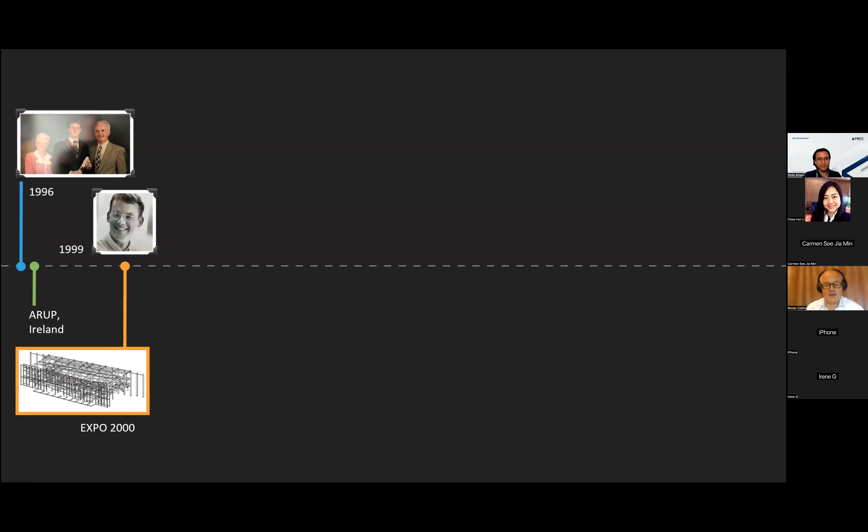So throughout my presentation, I'm going to use a timeline from when I graduated from university in 1996, which means I'm now giving away my age. I'm nearly 50 years old. I started my career working for Arup in Ireland. In 1999, the time of the millennium bug, my first experience of BIM and 3D modeling and construction 3D work was actually a project in Germany for the Expo. I was the manager for the Irish Pavilion as a structural engineer. So that was my first exposure to 3D modeling.

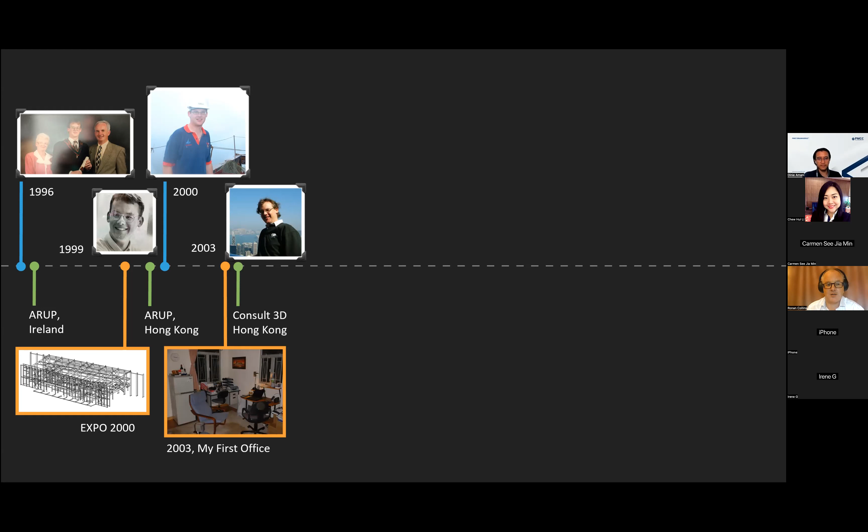In 2000, I moved to Hong Kong and I joined Arup in Hong Kong. This is a picture of me standing at the top of IFC2 during construction when I was younger and a bit thinner. And then in 2003, after spending a bit of time working for Arup, I started my own business. So since 2003, that's when I've really started my journey into BIM. And I've been an advocate for technology in construction since then. And there's a picture of my office. So that kind of sets the scene for my career. I'm a civil engineer by graduation, but I'm a technology expert in construction.

So in 2003, I set up a company to use detailed models to reduce construction costs and ensure buildings were completed on time. And what's interesting is in 2003, I thought I would have maybe 5, maybe 6 years and the industry would catch up. And here we are 20 years later, and we're still trying to get the industry to catch up. So one of the things I want to get across is that the BIM world is going to be transformed by the software companies, and it's also going to be transformed by the users. So how does it look comparing what was done 20 years ago to what's going on now?

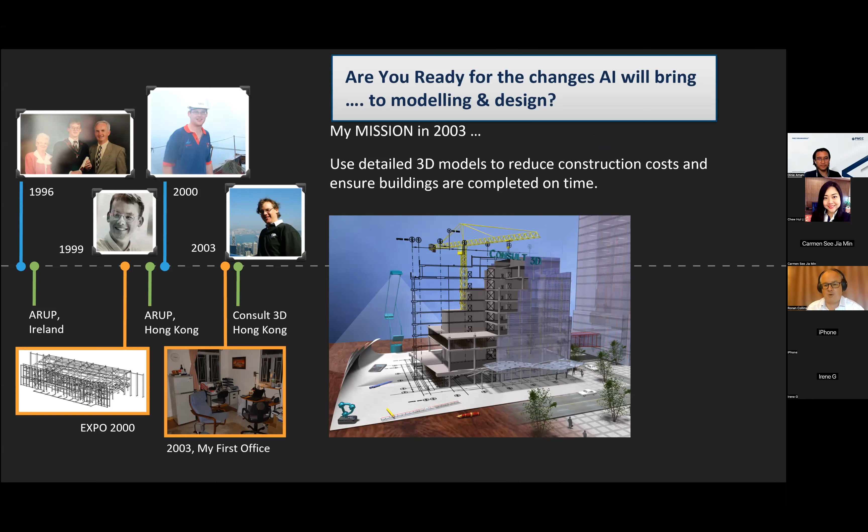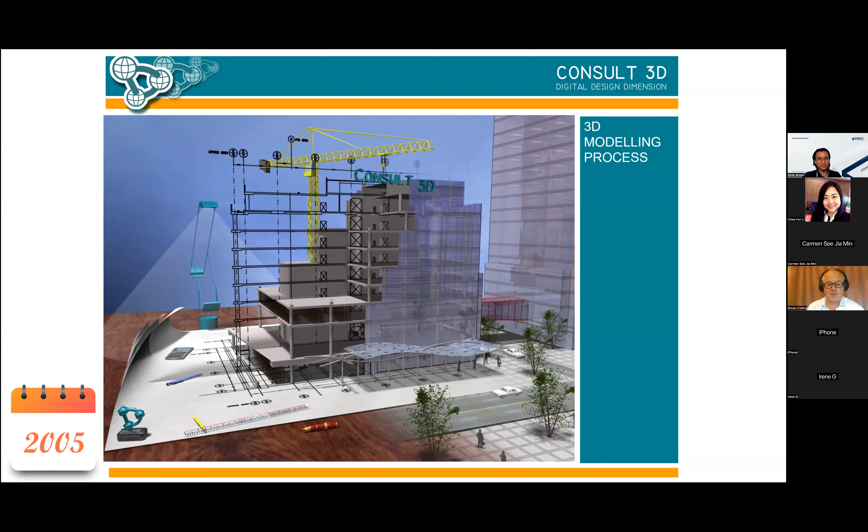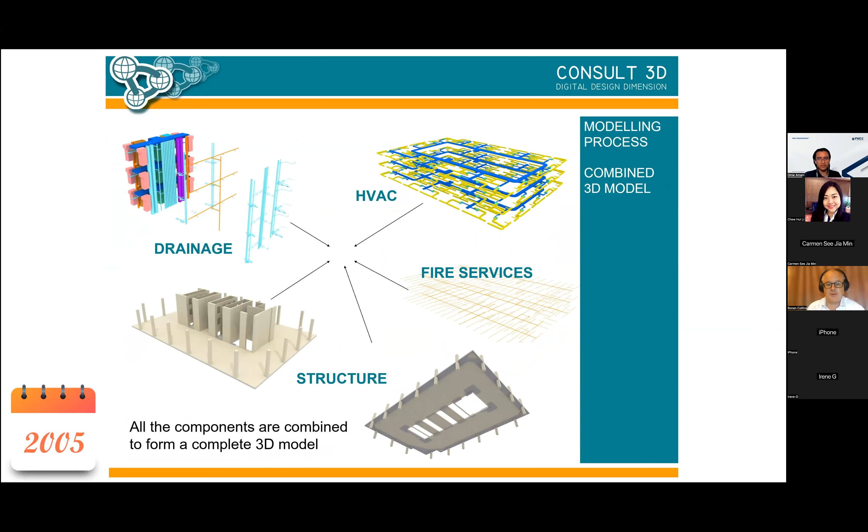So this is an image. This is actually a couple of slides I found in my archive from a presentation I gave in 2005. And I could give this presentation now, and it's just as relevant. So in order for you to actually say that you've got a BIM process, you need to have initial models. So you've got to have your structural models with as much detail as possible. You need to have your mechanical models, again, detailed out. And also you need to have all your risers, your pipe systems, your fire sprinkler systems. It's all going to be modeled up. And those models can then be what we call federated into a combined model or a central model. So when you put all these elements together, you then end up with what we call a complete 3D model of the structure.

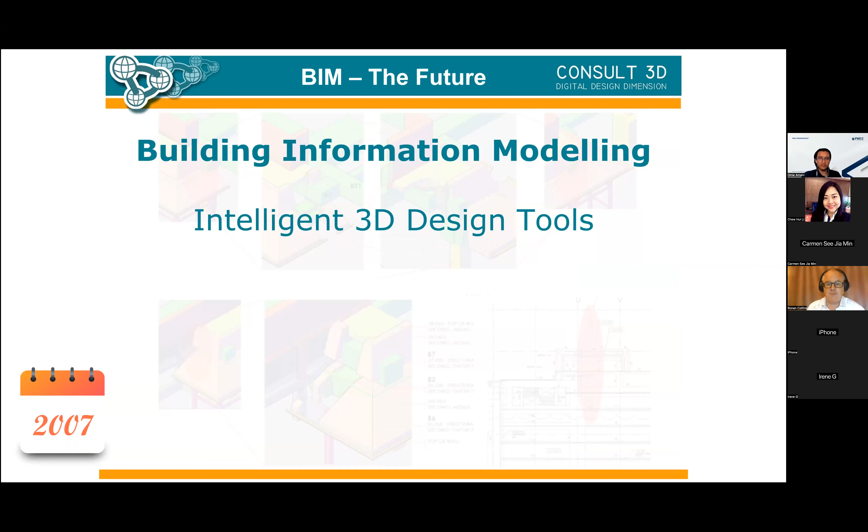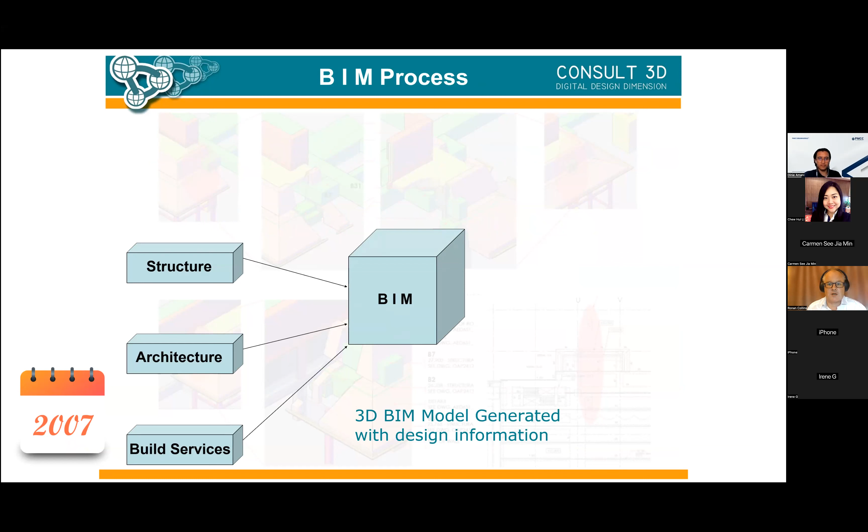Go slightly forward to 2007 when the actual term BIM or building information modeling became a bit more commonly understood. And the difference here is that the models were generated by the consultants. So you've got structural models, architectural models, building services models, and then you can have specialist systems. And those models are used to do the design first. You do your coordination, you sort out your difficulties, and then you produce the drawings.

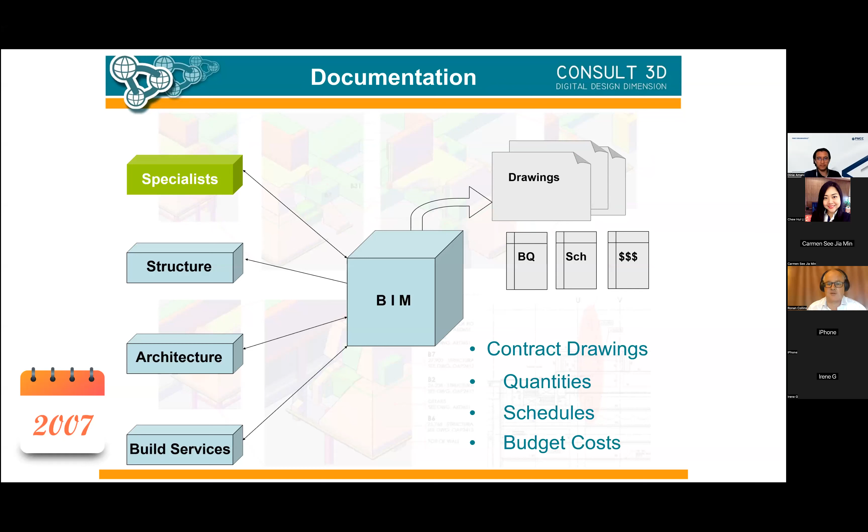And the other thing that came out of this presentation, which I thought was quite interesting, was the first time I'd seen this term BIM manager. So this is a role where the manager is basically managing the process of generating these models, and you have teams of people supporting it. But these are not separate. These are the structural team, the architectural team, the building services team.

So what's the difference between 2003 or 2007, that time frame, and today? And what's the impact of AI? So back in those days, we used AutoCAD 3D modeling. We used things like the forerunner to Civil 3D, and we even started using the forerunner to Revit. And now what we're looking at is what is Autodesk doing? Autodesk is the preeminent vendor in this space. So when it comes to BIM tools, Autodesk is the behemoth.

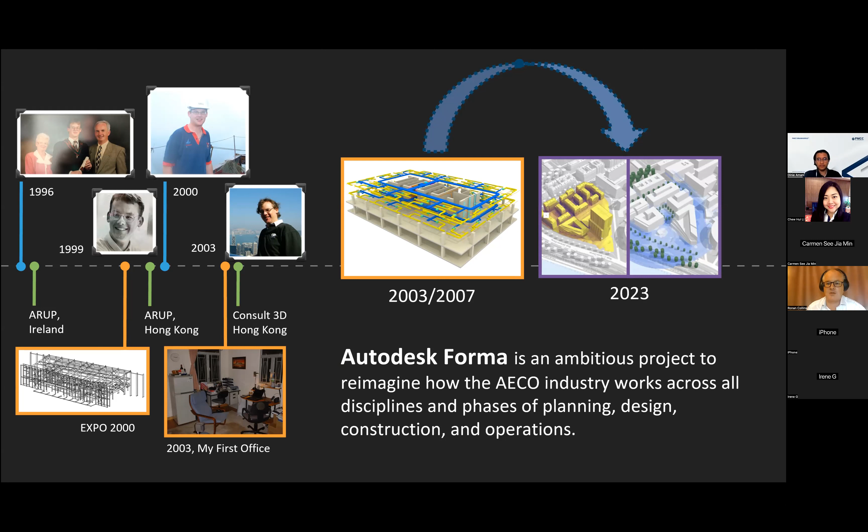And they've announced in the last 12 months a new platform called Forma. And this is basically going to transform, or in their minds, transform how we operate in the industry, because they're going to move away from a file-based system to a database system. So it's all going to be driven by data. Now, Autodesk are going all in on Forma. And you can tell this by the way they're recruiting. They've got advertisements out at the moment, and it's quite clear they're going to bet big on AI.

So what are they doing? What they want to do is change the way that we, the industry, capture information, use that information, and exchange the information. And being Autodesk, they want to control that arena. So they want to be in the space where they're actually doing all of that capturing and analyzing and exchanging. The way they talk about this in Autodesk speak is they're going to empower our industry by transforming how we, the professionals, are using data to capture knowledge, inform our decision-making, and deliver projects.

So Autodesk are moving in on the data space, and they want to use data as the backbone. They don't want to use models. They don't want to use files. They want to start setting up this granular data on which everything else is based. And so if you want to learn more about what's going to happen in the space of BIM and AI, then you need to study Forma, and you need to watch what's going to happen with Forma.

But what's interesting is Autodesk are talking about a 7 to 10 year time frame. So their roadmap for this technology is not quick, it's not short, it's long. And they believe that it's going to take a long time to get the industry to catch up. So they're not trying to do this quickly, but they are going to be doing this for the long term.

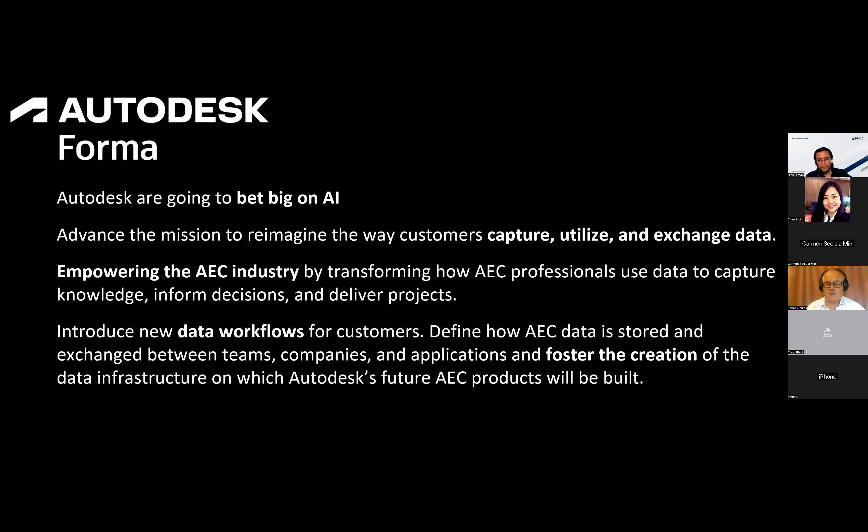And what's interesting is from an AI perspective, the lessons that we're learning now about ChatGPT and the security of information, the rights to information, the IP in the information is going to become a critical issue for architects, engineers, and contractors who deal with Autodesk, because there is a risk that when you start putting your information on their systems, they're going to leverage it for their benefit and their profits.

So it needs to be done carefully. So that's BIM and AI. And I say, I'm going to race through this, so if you have got questions, do interrupt me. I'm going to step into the next domain, which is construction planning.

So again, using a slide from 2005, this was the reason I got into BIM in the first place, was the idea that you could link the construction planning information, effectively a Primavera P6 schedule or a Microsoft Project schedule, to a model. And so you could take all the tasks in that construction sequence and simulate what that would look like in a building sequence. So again, a very early simulation of what this would look like. This was done to prove the concept.

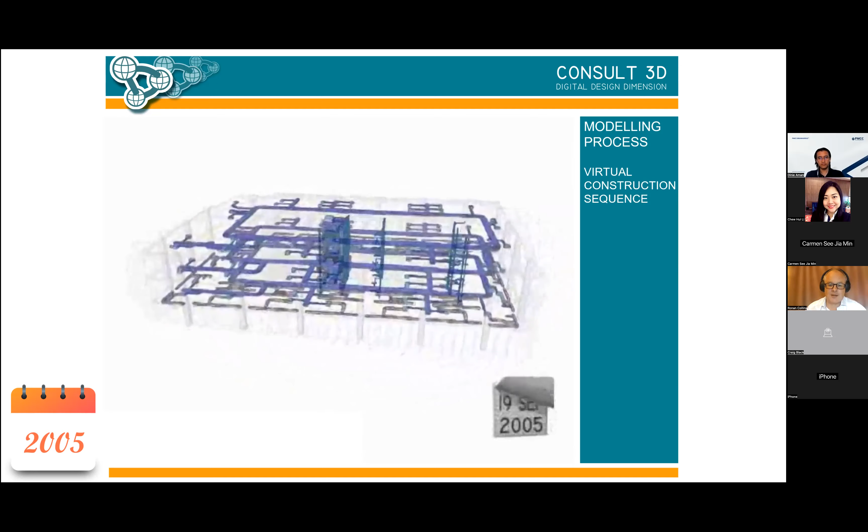So we basically took a model and then we linked it to a construction sequence. And here you can see the installation of ductwork inside the building, while you can make out the installation of the curtain walling on the outside. So again, this is 20-year-old technology, but it's not used on projects today. And you have to wonder why. Why are contractors not using this as a kind of a normal process?

So in terms of this technology, in terms of BIM, we call this 4D or 4-dimensional. So you're basically adding time to the model. And this can be useful across a number of domains. So again, I'm sitting here in PMCC's office, and they're a very well-known project management company. They deal with project scheduling on a regular basis, if not in their daily work.

So you can use 4D at the early stage of a project during design. You can use it during tender to understand a project and do some construction planning. You can definitely use it during construction. It's very good for safety planning and site logistics. But more often than not, we're seeing it used in claims. So it's used for claims of what was actually planned against what actually happened, and then recording what happened in design changes.

So I'm going to show you an example that we worked on a couple of years ago on a stadium project, just to give you a sense of how powerful this tool is. So this was a stadium in Atlanta. It's called the Atlanta Falcons Stadium, or some people know it as the Mercedes-Benz Stadium. If you get a chance, look it up on YouTube. The roof on this thing is incredible. It was designed by HOK, and it opens like a camera lens. It's got an aperture. It's 30 stories up in the air, and it's 23,000 tons of steel.

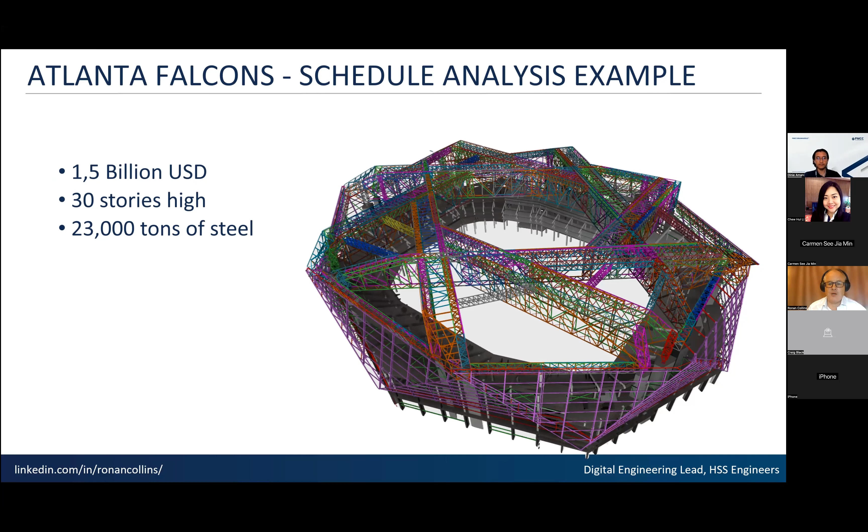And we used 4D just to plan the erection of the steelwork. So we had used Tekla Structures to do the detailing for the steelwork, and then we used the 4D modeling to actually plan the erection of the steelwork. And the reason being that the craneage is quite complicated. So this is an image from the model. You can see there's a lot of steelwork that has to be partially erected on the ground, and then it has to be lifted into place.

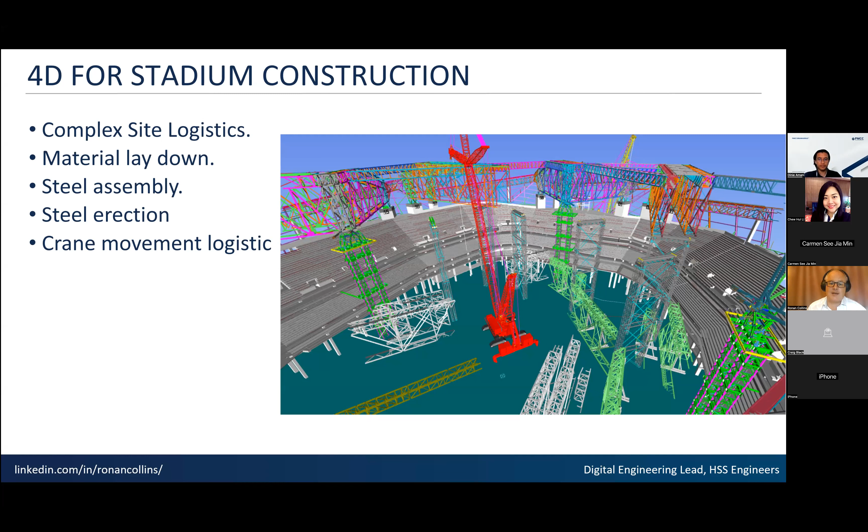So you need cranes for the erection of the steelwork in the laydown areas. You need cranes for the steel assembly, and then you need cranes for the actual erection of the trusses in the air. So we used a 4D model to actually come up with a plan in terms of temporary works, site logistics, deliveries, et cetera, of the cranes. So you can use these tools for very effective construction management.

And this is just a little excerpt of what that looks like. So you can see in this sequence the erection of the roof in the multicolored steelwork up in the air. And as the video progresses, you'll see how it gets much more confined as the project goes ahead. So here you can see the erection of the towers. And then you're going to see a lot more equipment turning up on the site. So at one point, it's going to be 7 or 8 major cranes inside the works area. Some of those cranes are doing initial assembly, and some of those cranes are doing actual installation.

The great thing with this project, it was very well documented. So if you really want to see what they were doing and look at it in a lot more detail, there's a lot of videos on YouTube of the actual sequence of works, and I'm going to show you one snippet in a second. So we used this 4D sequence to actually work out the crane locations, work out the method statements, everything else.

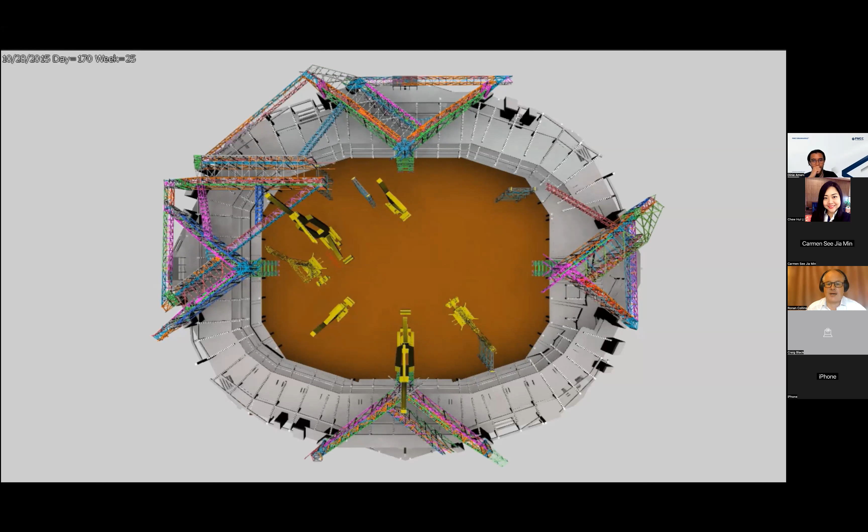But we did it in a process that's very manual. So every time we wanted to change a sequence, we had to update the schedule, we had to update the durations and schedule, we had to update the number of cranes, and we had to go and change the simulation. It took a lot of effort to figure out in one kind of scheme whether it would work or not.

And where AI is going to make a difference is AI can run hundreds of thousands, if not millions of iterations very, very quickly. So I'm going to show you what this looks like in the real world, and I'm going to show you how AI is going to change how we do construction planning. So that's just an example of what the sequence model looks like. And just to show you, oops.

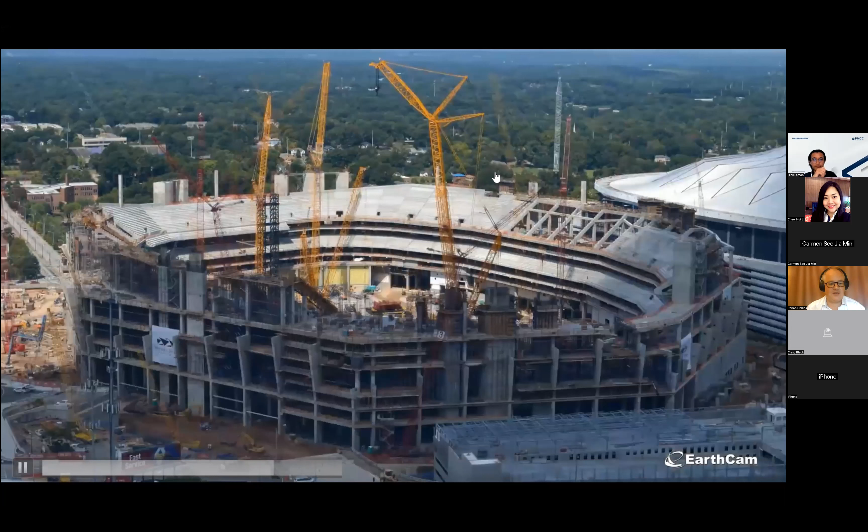Oh, Carmen's shaking her head. I forgot to do one thing. I forgot to turn on my share sound. Hang on 1 second. So even the technology guy gets it wrong sometimes. Let's try that again.

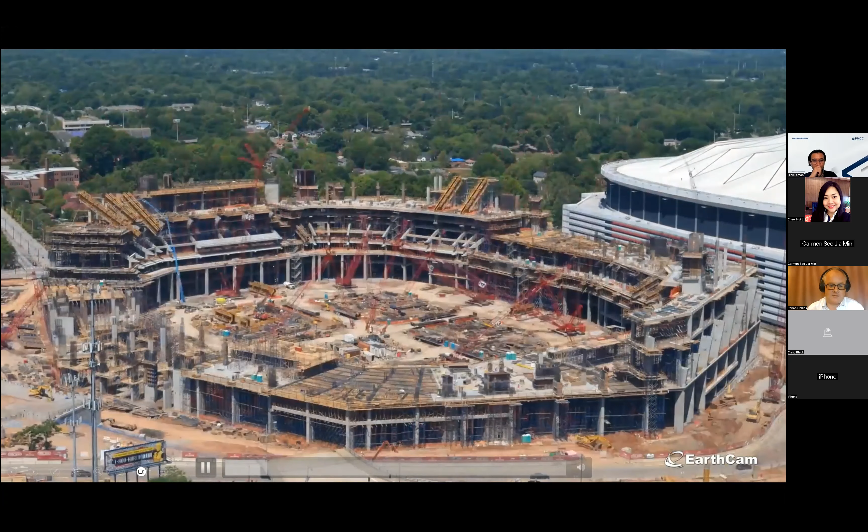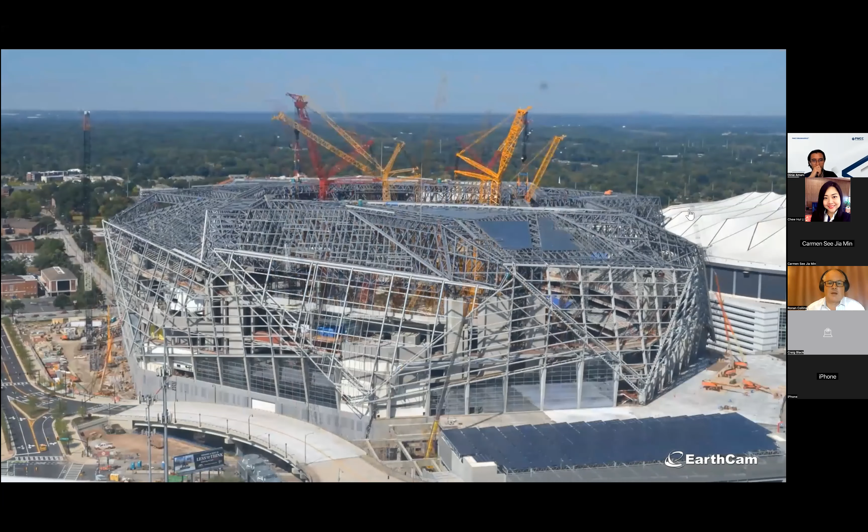Okay, you can see all the cranes getting stood up in the air to go to the work. So you can see here the complexity of a building like that. These are unique buildings. This was a $1.5 billion ego project. So the people that build these stadiums are the billionaires in the US economy, and they're all showing off.

But the important thing here is that it doesn't have to be a complicated project to use these kind of tools. Obviously, they're useful, but the idea of using a model and a link to a schedule to do planning is critical. And in the theme of this presentation about how AI is going to change our world, I want to bring your attention to one technology called Alice.

Alice is a technology that's coming out of the US. People have known about it in kind of general terms in the last 3 years. They've been at it for the last 5 or 6 years. It's a rule-based system that relies on a model. So if you don't have a model, you can't use this Alice tool. And it does explore millions and millions of options. So it will go through a whole bunch of scenarios about how you can do this. And it will disrupt the industry.

Now, it will not be for everybody. It's not the cheapest technology in the world. It's an expensive tool to use. But if you have a very sophisticated way of managing projects, if you've got tight resources, and if you've got constraints of many complexities, this is a tool that you should be looking at. So I'm going to show you an example from the UK where they're actually using it on a railway project, and it will give you a very good flavor of how Alice is actually used. So I'm going to hand over to the guys who are on the Alice project.

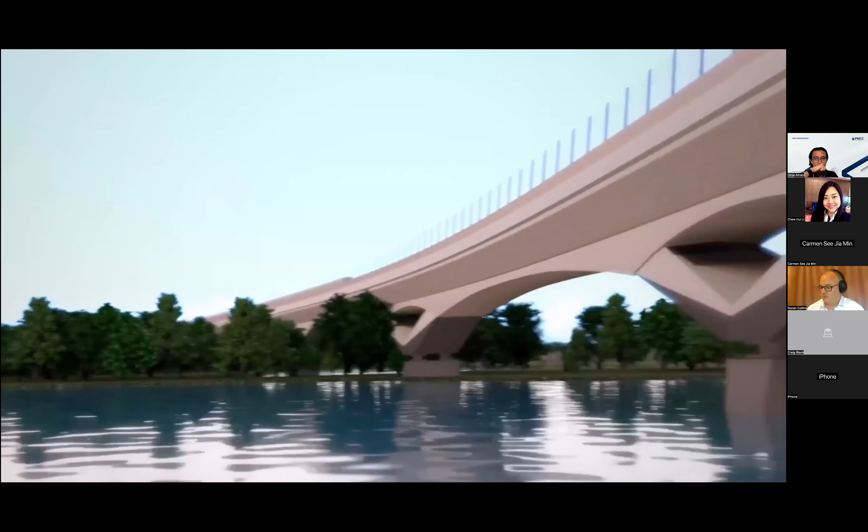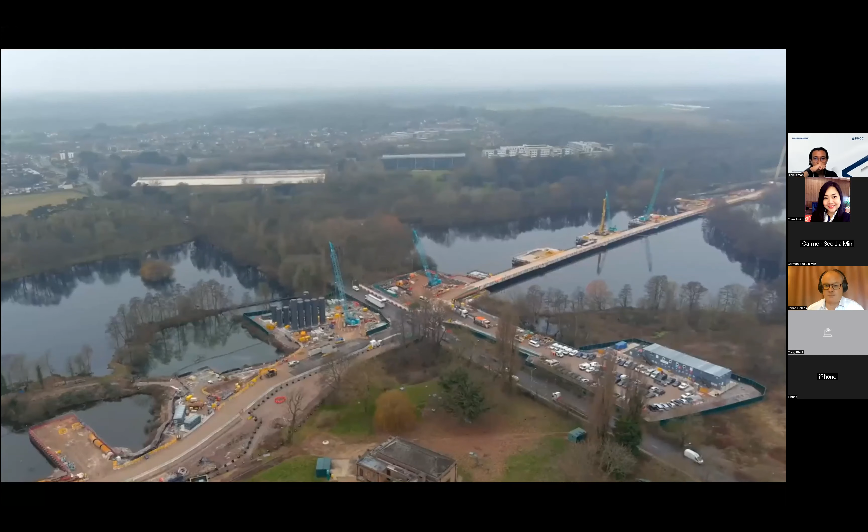HS2 is high speed 2. It's the second high speed line that the UK's invested in. It's reducing the time to move between major cities and hubs. It's quite a complex job site over a big area. So we've got a 3.4 kilometre viaduct, which is going to be the UK's biggest viaduct. And we wanted to use a tool like Alice Technologies to help us model and understand the complexities with all the constraints we had. HS2 will be the fastest rail system in the UK. The structural constraints we've got are phenomenal.

The optionality model is very exciting because it gives you a lot of opportunity for scope, for analysis, but also it gives you some good data in terms of how it affects time versus cost, and the sequencing on the deck as well. Software providers that are already in the market are offering small functionality changes, but what this is doing is really turning it on its head in a lot of senses. There's the kind of old guard way of working and sort of standard software packages that we would all know how to use, and Alice is offering an alternative view.

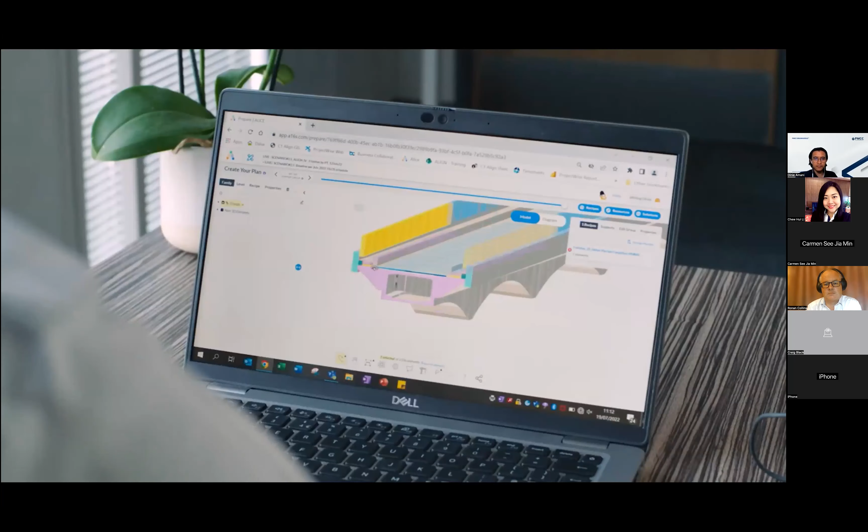The other software that I've used is Microsoft Project and Primavera 6, which as planning tools are only as clever as really what's been input into them. They don't have an artificial intelligence facility, whereas with Alice, you can input the model, you can input the recipes and your desired sequence with constraints, and it actually builds the best way for you to carry out the works. As we've applied and trained our staff to utilize this, we've been able to get substantial improvements in our programs.

This software is something they can trust and utilize.

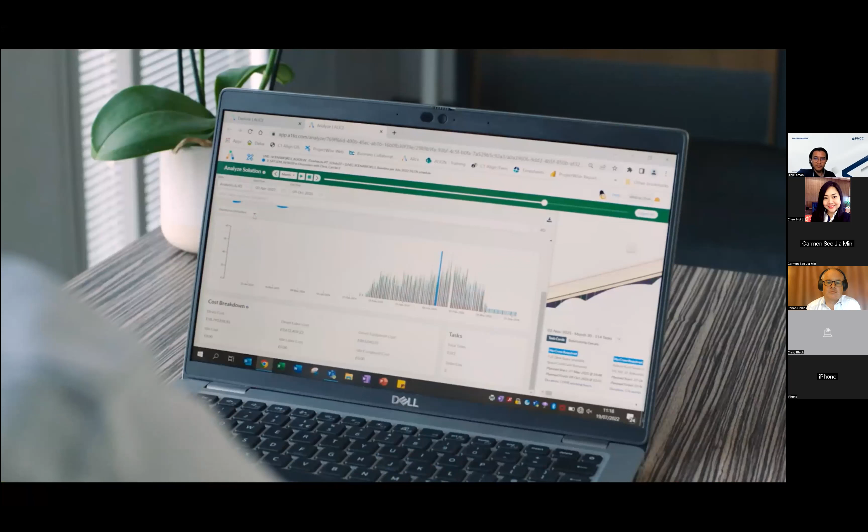We moved into this multi-dimensional area where we could see lots of dots on the graph of cost and time, all with its own program with a different way of doing it, and that really made our management team sit on the edge of their seat and go, wow, this allows a different sort of level of conversation to take place.

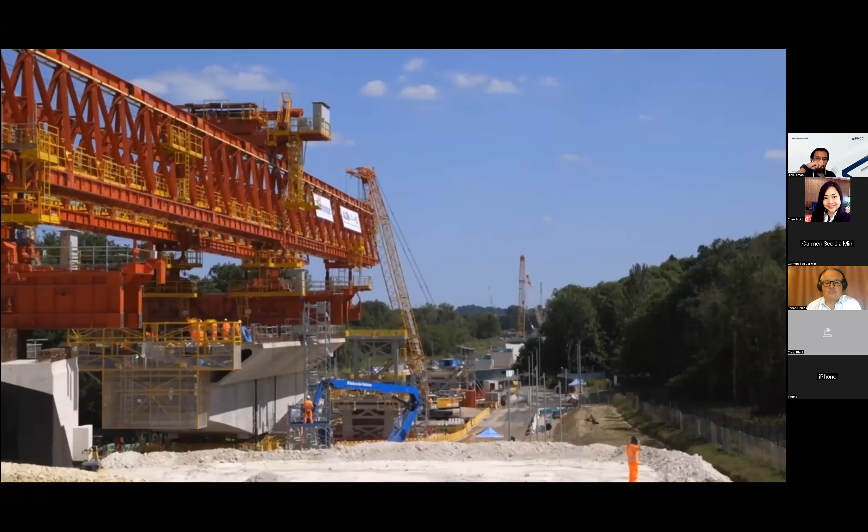It's brought everyone together on one platform to really discuss different ways of doing it. It's helping us work more collaboratively and openly in our planning. We're utilizing Alice recipes to capture the very diverse amount of knowledge across our teams. The more information you feed into it, the more accurate the whole model gets. There's clarity in being able to define exactly how we're going to build it, in this exact sequence, with these exact resources. We can tweak and modify the recipes, but essentially that knowledge is captured.

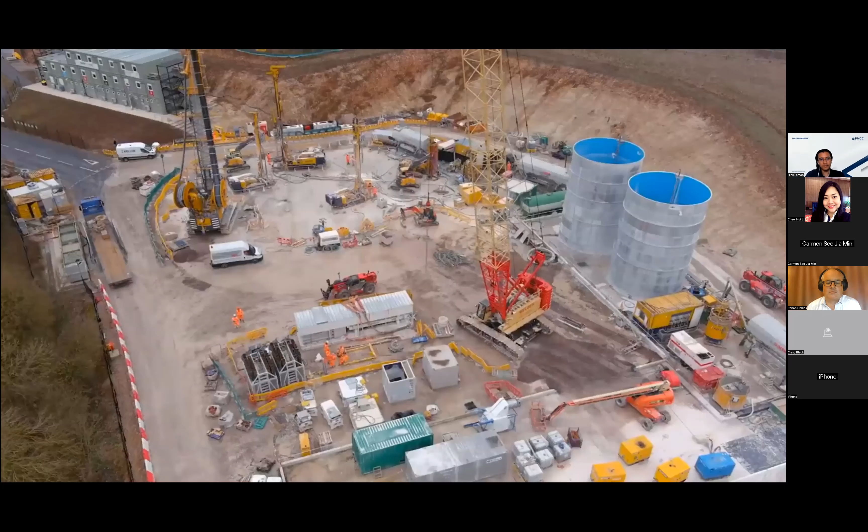This new approach has really opened people's eyes to a faster way to do planning and to explore all options. The Alice team have been really supportive to us, and they're not just software experts on Alice as a platform, they're experts in construction as well. That's been a really great experience.

There you go, that's a free advertisement for Alice Technologies.

So going on in terms of the timeline, again, do interrupt me if you've got some questions. I'm going to jump a bit further into my career and into the complexity of BIM. As the years have gone on, the projects I've got involved with have got far more complicated.

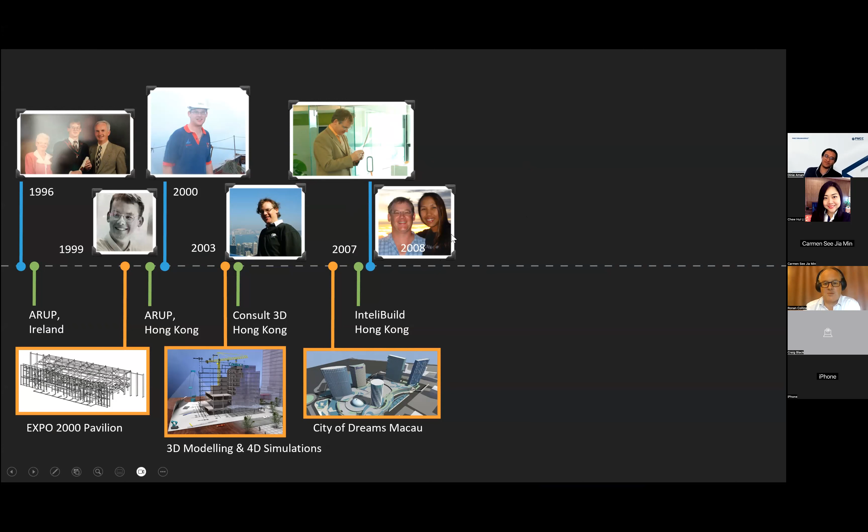At that time, I was working on a huge project called the Cathay Pacific Air Cargo Terminal in Hong Kong, which I'm going to show you a few snippets of. This is probably the project that was the first real project of doing BIM. It brought up a huge number of issues around engineering management, design management, and model management, which I'm going to show you. And I'll show you some of the tools I would use now if I was doing this project in 2023.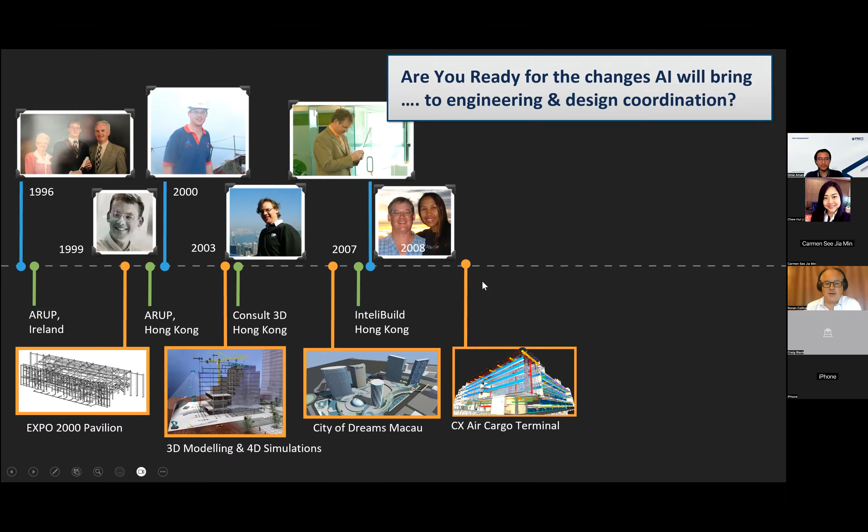So the model was started at the design phase. The owner made it very clear at the beginning of the project that the only way to build this building was to actually design it in 3D. It's such a complicated building with so much complicated equipment inside of it. It's hard to imagine doing this with two-dimensional drawings.

Effectively, what we have is a building that's wrapped around a cargo system. The cargo system is what it's all about, and if the cargo system is not working, it doesn't matter how good the building is. So the entire cargo system was simulated. I think they did a 10-year simulation based on expected flight schedules, expected cargo. Once we knew we had enough rollers, enough storage, then we would design the building around it.

So a digital twin is effectively the same thing. A digital twin is supposed to be running the operations and being able to manage and predict the operations. I'm not sure what they're doing now, but I know the entire system is automated, it's all being computerized.

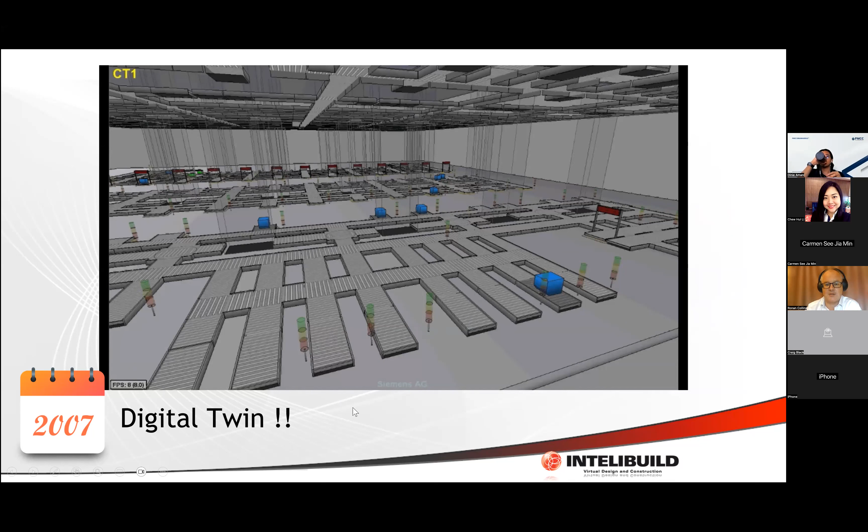Going back to the base building, we use Revit structure to design the frame of the building, and the building is substantially huge. It's actually huge, it's a 20-meter grid, and the structures are, in some cases, 1.5 meters deep. So it's a very, very large, very robust structure. And we managed to make sure that we did some fundamental things at the beginning.

So we started to classify objects, and you'll hear me talking about classifications as we go through the presentation. It's a key part of the AI. If you don't have data classification, you can't unlock AI.

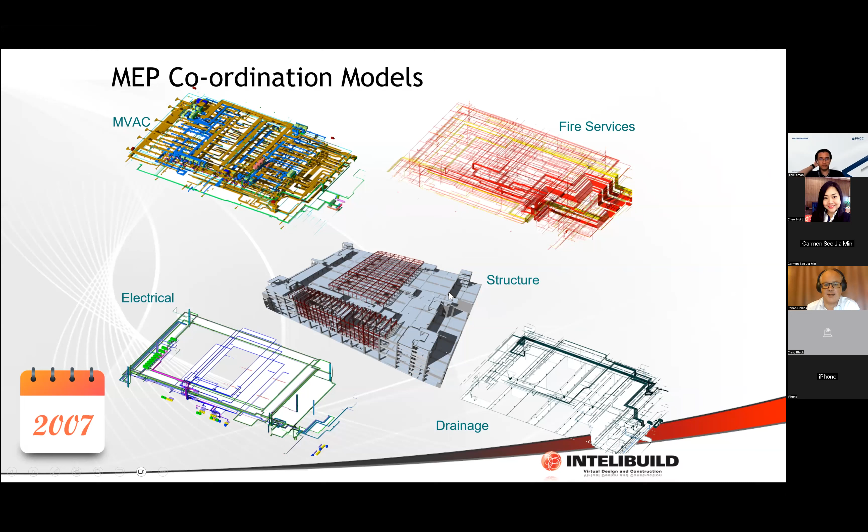There was a bit of architecture. Given this was an industrial building, it was primarily driven by engineering. You can see that the building contained a lot of mechanical services, fire being a huge issue, smoke evacuation another issue, electrical supply was a massive concern because the whole thing was automated. And if you have a fire sprinkler system, you've got to have a drainage system because sooner or later the fire sprinklers are going to let off. When you put all that together, you end up with these very complicated, very congested MEP systems.

One thing that we set up on this project, back in 2007, was a very robust classification system. That was done for two reasons: one was for quantification, so we wanted to be able to use the model to quantify as much information as possible, but also to be able to run analysis. We were able to use it to run clash analysis and interference analysis, but classification was critical.

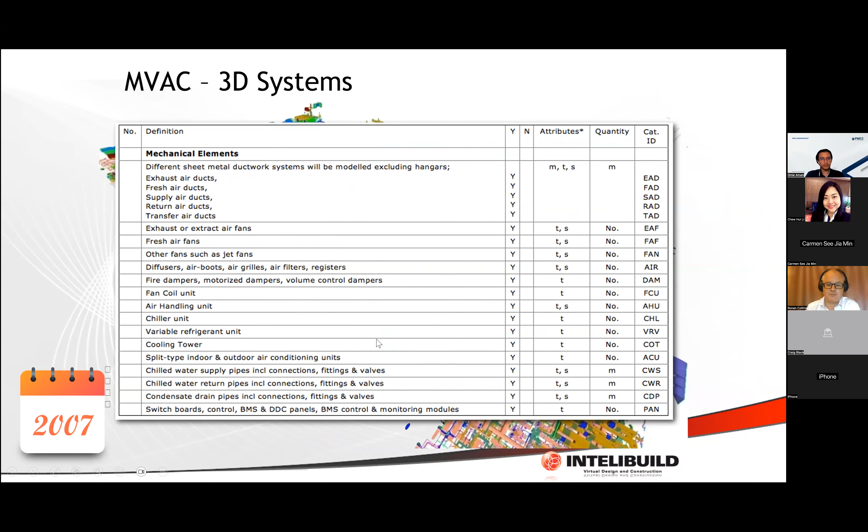And then once we had the modeling done, we would use the models to produce drawings. Our team set up the entire process around how the engineers built the models, how the draftsmen used the models to produce drawings, how the engineers checked those drawings, how those drawings got sent out for construction. Our team managed that whole process, and there's a lot of planning required. It's not just a case of go away and build a model in Revit and press a print button. You have to think through the entire process.

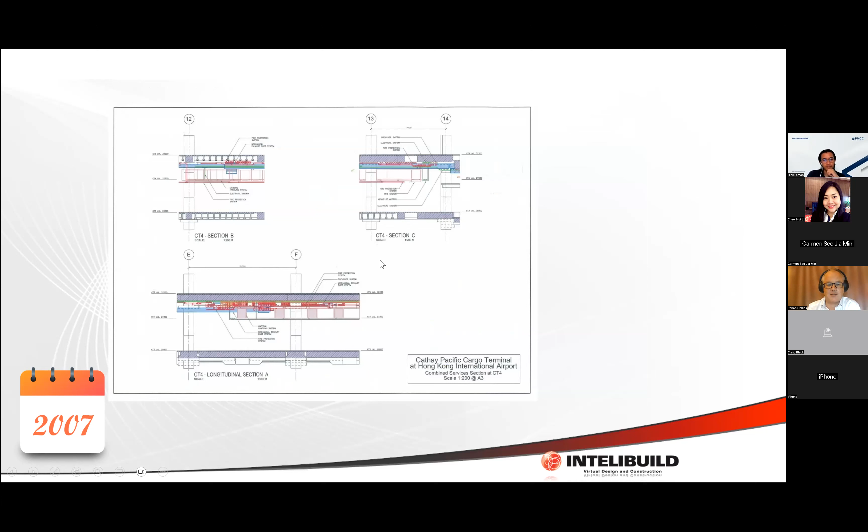Here you can see some examples of cutting sections to these models. This is effectively a 2D drawing, a cross section, and all of the stuff on the screen is automated. If you set up your model correctly, there's very little CAD work required. You're always going to require some CAD work, but if you can set the models up correctly, you can get the annotations automated, the dimensioning automated, all the line work automated, so you can spend your time doing engineering and reduce your time on drafting.

But that only happens if you plan out the process. And what we see happening more and more often is that people don't spend time planning their templates, and you end up wasting a lot of time. So one of the things that we set up in that project, and it's always fun to go back and look at slides from many, many years ago, this is actually the process that we set up to produce drawings.

We had a server in the office. In 2023, that will be on the cloud, people would use something like ACC. But in those days, we were server office based, so you had to go into the office to do work, you couldn't work from home. All the drawings were produced as CAD files from the models, and then those drawings were published into PDFs and non-editable DWFs that were sent out to the contractors.

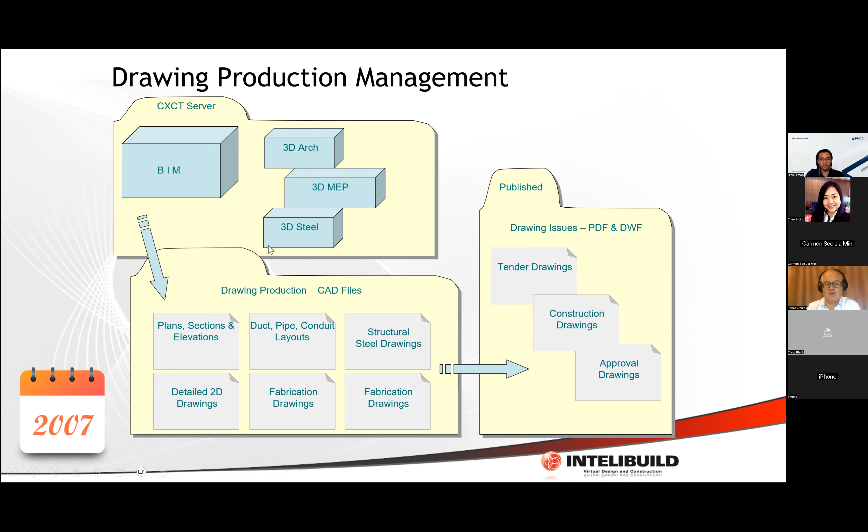If you're familiar with the PAS 1192 or BIM Level 2 standards or ISO 19650 standards, this is what it was intended to be. There was a controlled environment for production, a controlled drawing production environment, and a publishing system. When you look at the folder structure, it looks just like that: there's a live environment, which is what we call now work in progress, and a published environment, which is what information was actually issued for certain purposes, and inside that are all the different disciplines.

Even then you can see we had a naming system set up in the project. We had something like 2,500 drawings for the contract design stage, and that basically was an early adoption of BS 1192. So we followed BS 1192 loosely. BS 1192 became PAS 1192 in 2013, 10 years ago.

Then in 2018, the BSI and the European Standards Authority issued ISO 19650, which is the current standard for BIM and information management of projects. If you think that projects only have 25% of BIM, I suspect that probably 10% of that are following ISO 19650. So the actual standards that are in the marketplace, readily available, easily accessible, are only being used on a very small number of projects.

In order to use AI, my argument is that you also have to make sure you're following the best practice and the best standards, because the software applications are based on these standards. And in the absence of these standards, if you're just running amok and doing your own thing, you're not going to be able to unlock the benefits of AI.

I just want to share with you one of the most interesting things I've noticed in the last 5 years, the way that people change how they're doing coordination. This is a clash detection matrix. It's a basic way of looking at coordination, and it prioritizes certain systems over other systems.

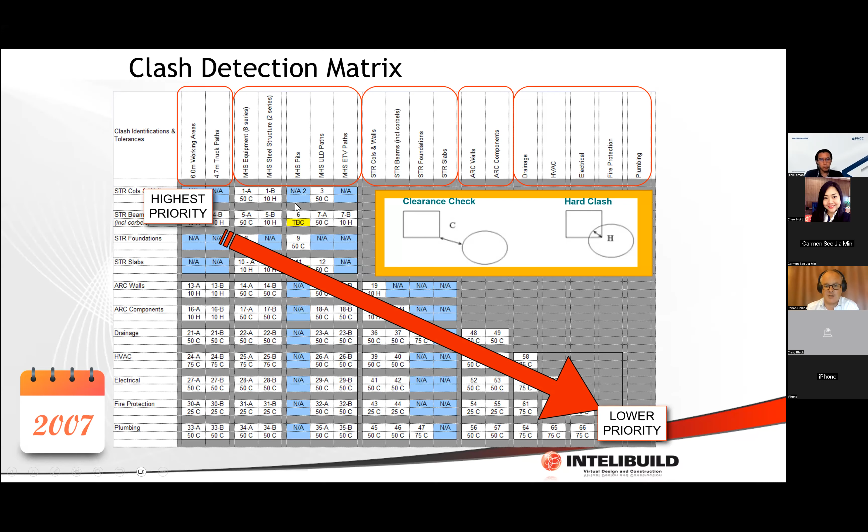I'm not going to go into the details, but I just want to show you that in those days, every single clash had to be done individually. So you had to check the fire system against the structural system, level by level by level. And that would generate hundreds and thousands of snapshots, basically images of a problem.

But in those days, I would have to print out a very long report and give it to the mechanical engineer. And then he would have to try and figure out where the hell this was in the building so he can go back and fix his design.

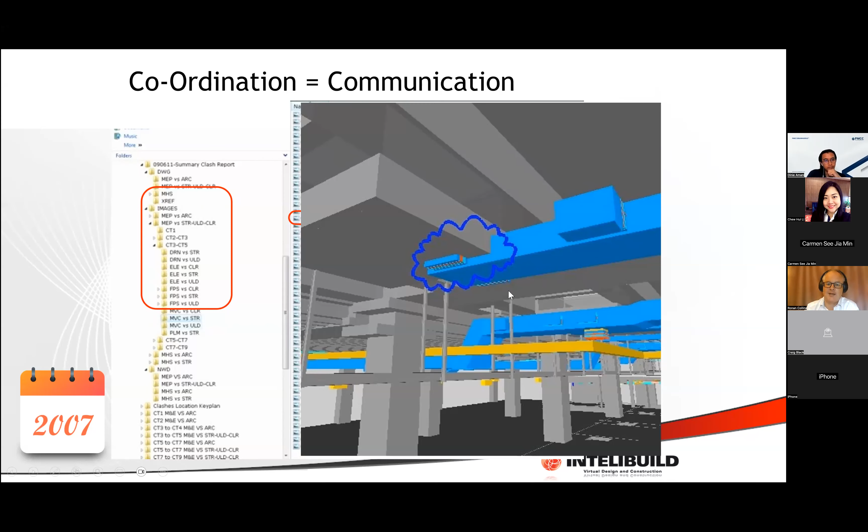We would generate these reports. There would be thousands of these issues. And some of them would be small, some would be major. But communicating them with the design team was a real challenge.

So what's changed between 2007, 2008, and now? I think the biggest change are tools like Revizto. There's a number of these tools in the marketplace, but Revizto is probably my favorite tool in this space. And Revizto has changed the game primarily because they've focused on the communication side.

Identifying problems in a model is easy. Documenting those problems is easy. Getting them fixed is very difficult. And the only way to get them fixed is through better communication.

I'm going to show you a little clip of a promo from Revizto, and you'll understand how they're going about it. You can see the difference between what I was doing 15 years ago and what the market is, what's potentially available in the market.

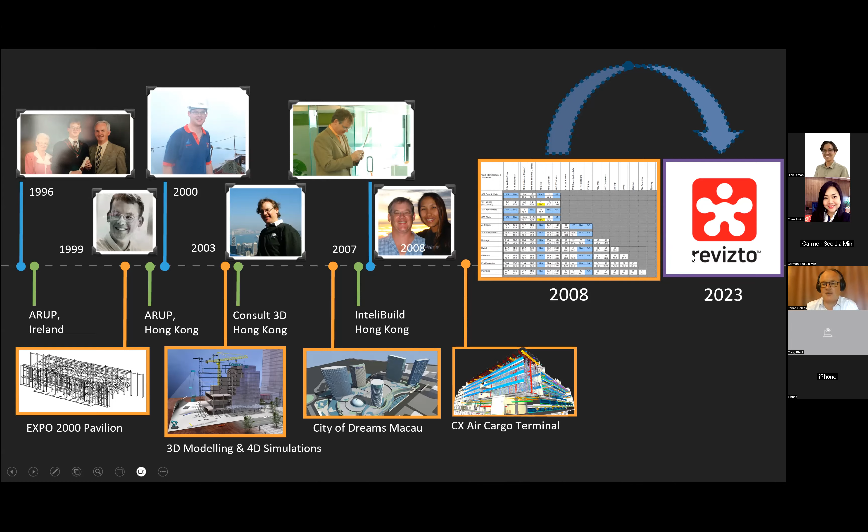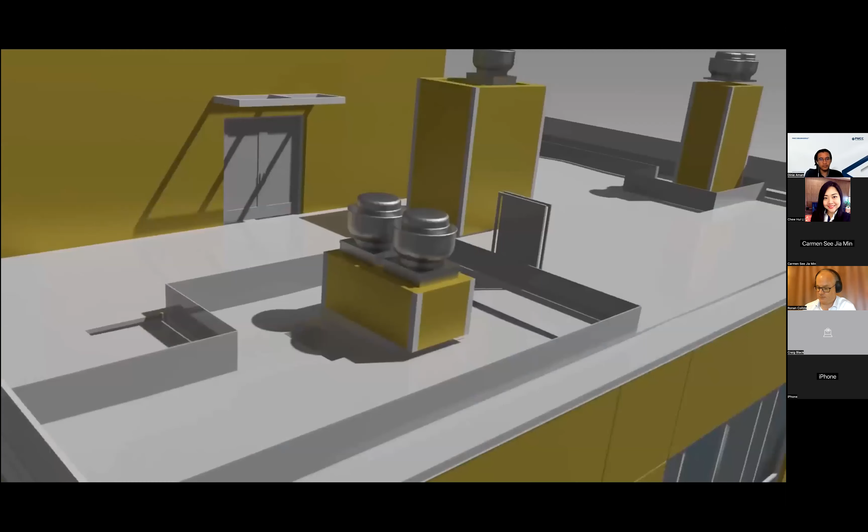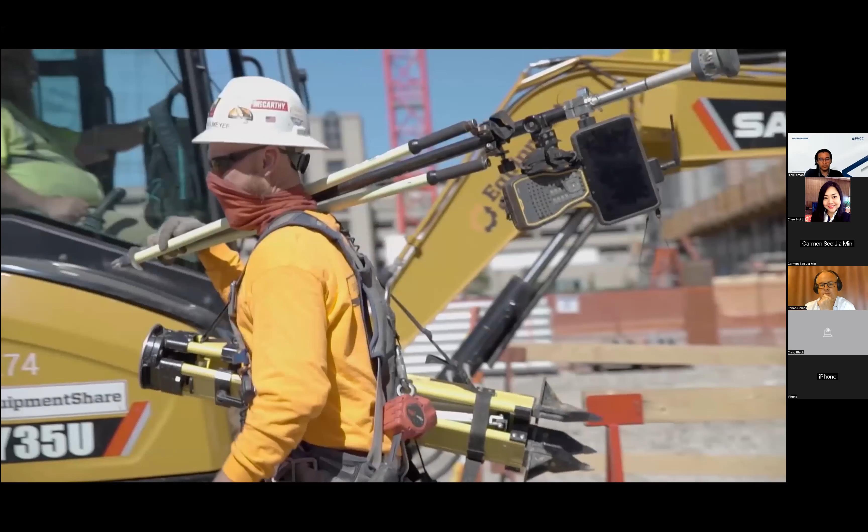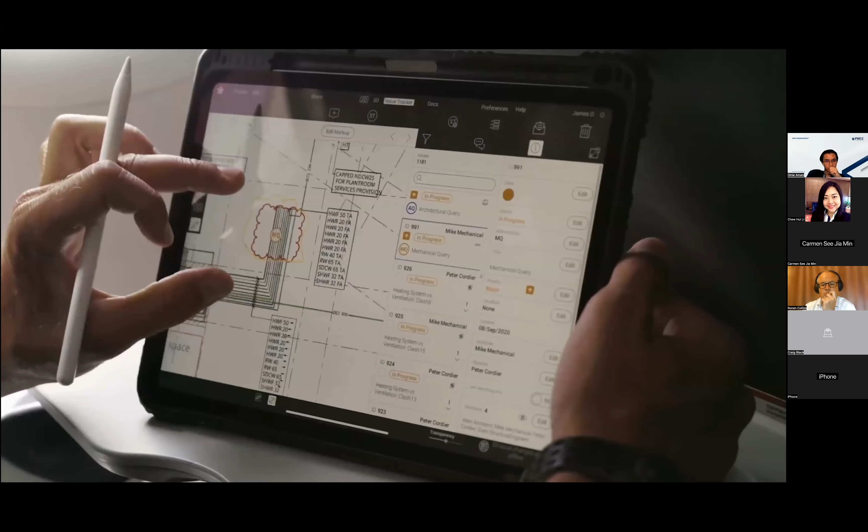Revizto is an integrated collaboration platform that solves these challenges by providing a single source of truth, accessible from any location and any device, and can be leveraged by all disciplines and trades, regardless of technical skill level, whether they prefer a 2D or 3D environment. As an integrated collaboration platform, it takes full advantage of the digitization of the AECO industry, from parametric modeling, BIM data, reality capture, and field technology. Revizto empowers users with an accessible, multidimensional model, allowing for a streamlined, proactive approach to issue and clash management. Project teams can work together across disciplines to identify, track, coordinate, and solve clashes and issues days, weeks, and months before they're built out on site, all in real time and from a single platform. Users can instantly communicate on tasks and address challenges together, and can be confident about the data and models in hand for better and faster decision-making. The project dashboards empower teams with a high-level project status, with granular details to understand exactly what needs to be done to keep moving forward. Revizto provides a new level of accountability, offering full transparency and better understanding of tasks and individual responsibilities.

So that's a tool that is a game changer when it comes to model coordination. What doesn't come across in these videos I'm sharing with you, because these are marketing videos, Revizto does not work out of the box. You have to figure out a system you're going to use. You've got to configure it, and you've got to make sure you've actually planned how you're going to deploy Revizto.

So it's not a case of go and buy it and use it. You need to have someone who actually understands the core model coordination process. So again, if you're thinking about using Revizto, I'm quite happy to share with you some do's and don'ts and some tricks to make sure it's actually successful on your projects.

Now, moving forward, this is where I think in the next couple of minutes, you're going to see where AI is going to have the most immediate impact in construction.

And I'm going to share with you some experience from 2009 and how things changed in 2019. So again, using my favorite project, the Cathay Pacific Cargo Terminal, here you can see a picture of the thing under construction. Hong Kong Airport is in the background. If I took this photograph now, there'd be another entire runway behind that because it built a third runway. But this is the project halfway through construction.

And the problem that we had in those days was verifying the installation on site compared to the model. So we'd done a lot of coordination in the model. We'd figured out where a lot of things need to be placed, so we didn't have any major coordination issues or delays. But then making sure that things were installed on site in the right place was difficult. And the only technology we had available at the time was basically digital cameras, which rapidly became iPhones.

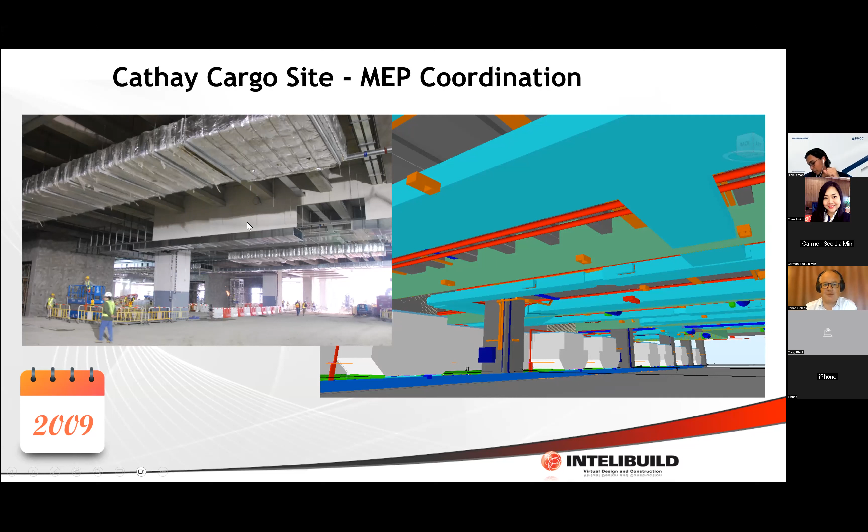But we would go on site, we would take 10, 20, 30, 100 photographs, and then we'd go back to the office and we'd try and figure out for each of these photographs where we were, and then we'd look at the model and compare them. So we would basically do a visual comparison between the site photographs that we got from a site walk against what was happening on the job site. And then we'd try and figure out if the pipe work was in the right place, if it was installed in the wrong place, if the duct work was in the right place.

It was very visual. It was inaccurate. And it was difficult to do, but we did find a number of issues and we did solve a number of issues. So it was an important process, but linking the model to the construction site is a real challenge. Unlocking that is a massive value. So if you can find a way of taking a model where you've done all the engineering, you've done all the coordination, and bringing that to the construction site and being able to check what's happening in the site in real time against the model, it's a game changer. And that technology wasn't available in 2009.

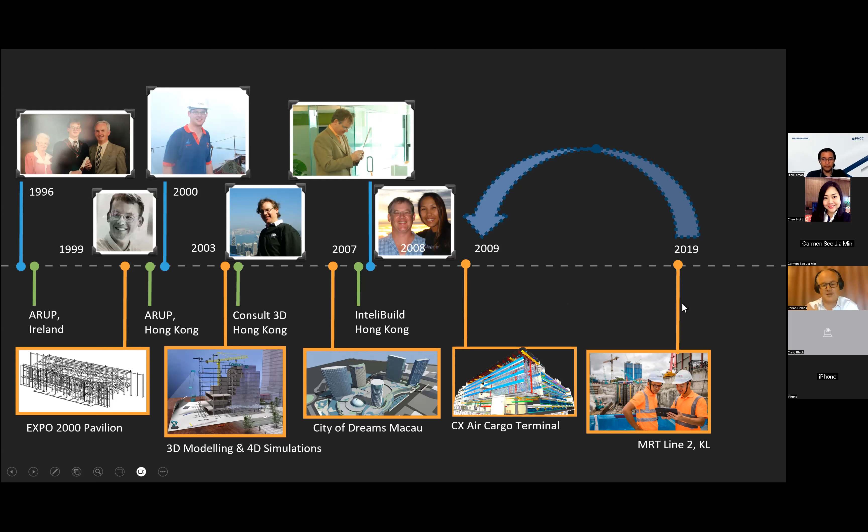We had photographs, but in 2019, when I worked on MRT Line 2, we started developing an augmented reality solution to do just that. So I'm going to jump 10 years from 2009 to 2019, and I'm going to show you a technology that I was heavily involved with at Gamuda. So this is a Gamuda initiative. This is called BIM AR, and it basically links the model to the construction site using iPads.

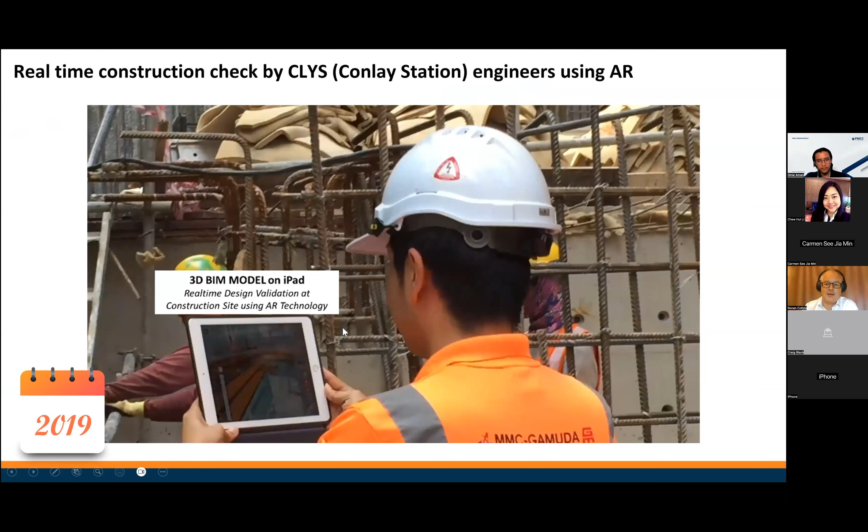So what you have is on the actual iPad device, you have a model for a particular area of construction. We don't have the entire project in here. We have areas of the building because the iPad's got a limit, but you can put the model into the iPad, and then from that, you can go on site and actually see the model in the site context. Now, there's a number of use cases for this. The first case is basically verifying that future equipment installation is going to fit where it's meant to fit. So if there's an opening required in a wall, if there's a support required, that it's actually installed before you start installing the next phase.

In this example, you can see that we were checking for penetrations for pipework to go through the walls. So these two are obviously, you can see the penetrations in the background. There's one missing here. So we identified there was an issue. This would then get raised as a ticket for the guys on site to fix. They would have to go and core something, et cetera. Now, we started doing AR at this level. So we started doing it for checking for openings for MEP.

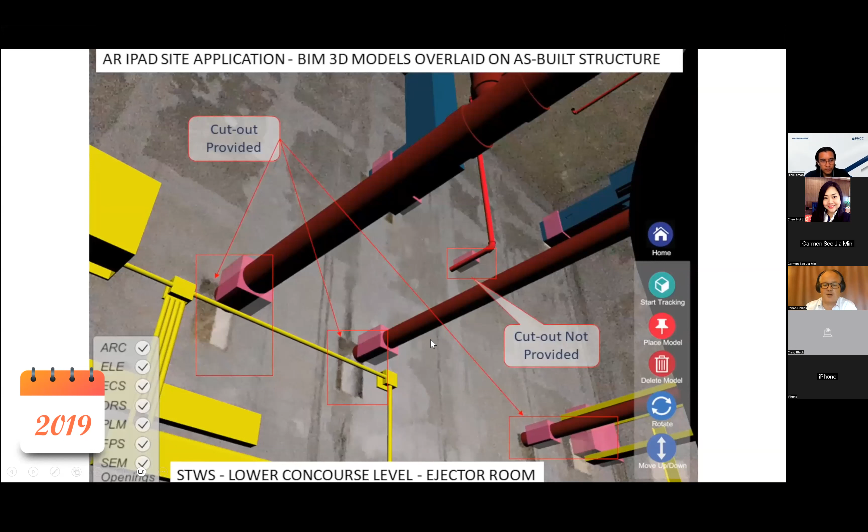But then the engineers on site quickly figured out, well, hang on, why are we waiting to pour the concrete? Why don't we check the rebar? So when they started, rather than waiting to pour the walls, they started using the same tool to actually work out, okay, are the openings actually in the formwork? Is the rebar actually detailed for the opening, et cetera. So they were able to use this augmented reality tool to reduce a huge amount of work on site, because they would build it once and then they would have to install. Now, there's two challenges in this. The first one is you need to have a model, because if you don't have a model, you can't use this kind of process.

And the second challenge is that model needs to be finished and coordinated, because if the mechanical guys start moving the pipework around, well, then the pipework's still going to have a problem. You're still going to need to core an opening. So you need to make sure that you've got a proper model management process. You cannot use these tools if the model is not good enough and if the model is not actually coordinated.

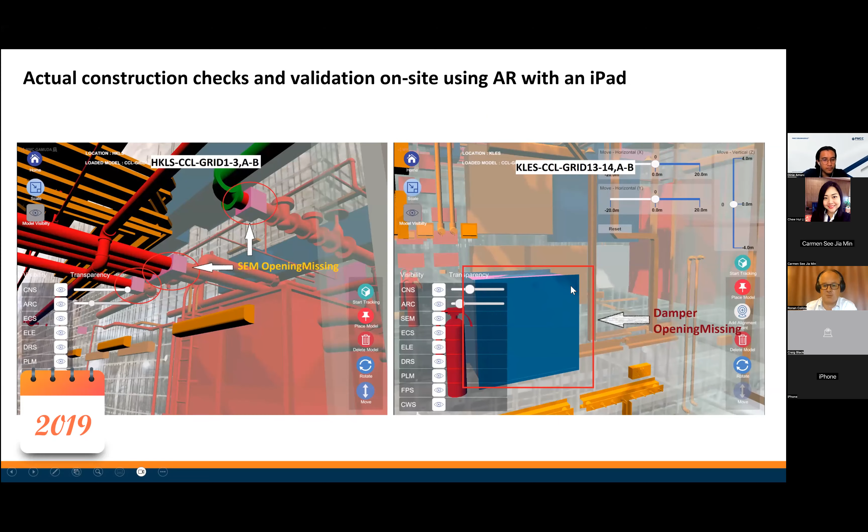So again, it looks great, but there's a lot of processes behind this, a lot of quality control behind this before you can unlock this potential. And one of the things that we did here, you can just see that you can add in a lot of detail. So here you can see a huge amount of information that can be actually put up on the screen. So that was 2019, jumping back to 2012.

2012, I got married, and then I started working on the next airport project, which is the Midfield Concourse. And this is where laser scanning, drones, effectively what we all now call reality capture, where that became really obvious in terms of a value proposition.

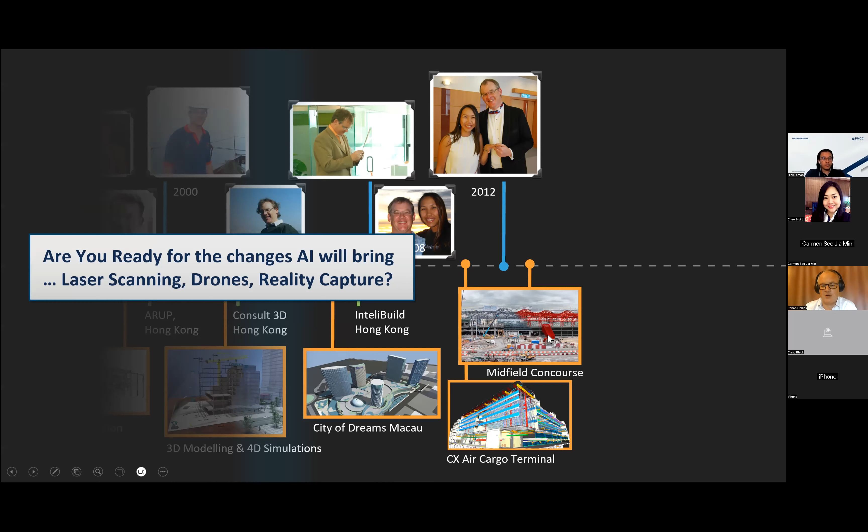So this is, again, the Midfield Concourse. This building is massive. And what's interesting on this one is that the owner or the project director on this, he came up with the term BIM is not actual building information modeling. He called it best if managed. So he looked at this through the lens of a project manager. So this is the Midfield Concourse project.

You can see the key to this building is that the roof steelwork has actually got exposed bottom chords. For those of you who are engineers will understand the term a chord, but the bottom of the truss is actually a curved steel pipe that is painted and is actually visible inside the airport. So the next time you're in Hong Kong airport, if you're in this terminal, you can look up and you'll see all these white bands. They're actually the primary structure.

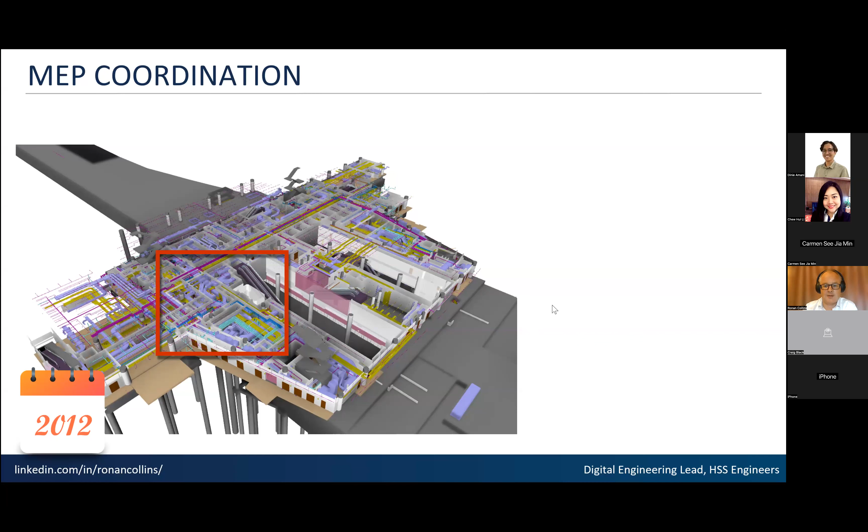And a couple things I want to show you here. This is the MEP coordination example. This should work. Here we go. So that's the design model. And I'm just going to show you one of the challenges that we have in the BIM world is that the design model is not buildable. Oh, where did that go? Oh, it's hidden behind. There we go. You have to then work with the contractor to come up with a shop drawing model.

And this is what you need when you start using tools like augmented reality, when you start using reality capture. You need a buildable, coordinated model. And the more detail that's in that model, the better. So again, if you think you've got a model from a design consultant, if you're a main contractor, you have to think long and hard about how you're going to get to a shop drawing standard model. It's not a case of just taking the design model and going out on the job site. It's not going to work.

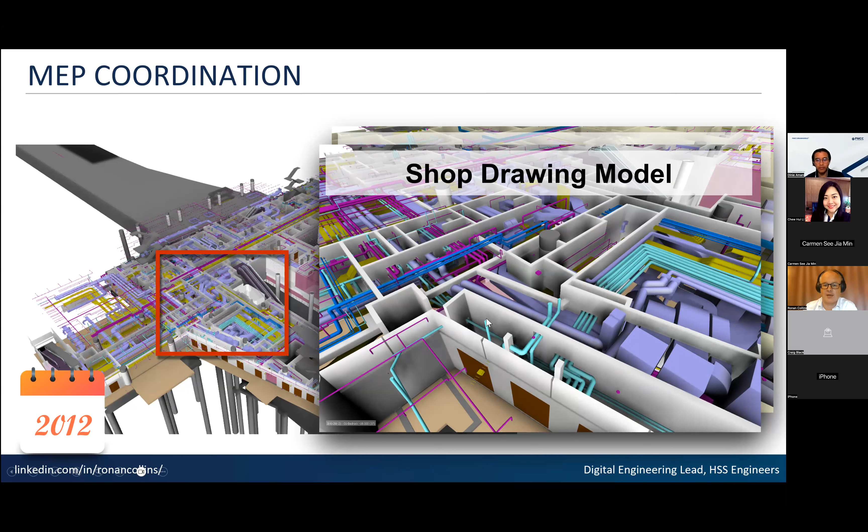And the reason I say that is there's a lot of coordination gets done by the subcontractors in terms of these congested corridors, in terms of the hangers, in terms of setting out, and being able to make sure that what actually gets installed on site is the same as what was actually coordinated is a big challenge. So it needs to be done by the construction teams. You cannot rely on a design consultant to work this out. They just don't have the experience and the knowledge, and they don't have the time to do it either.

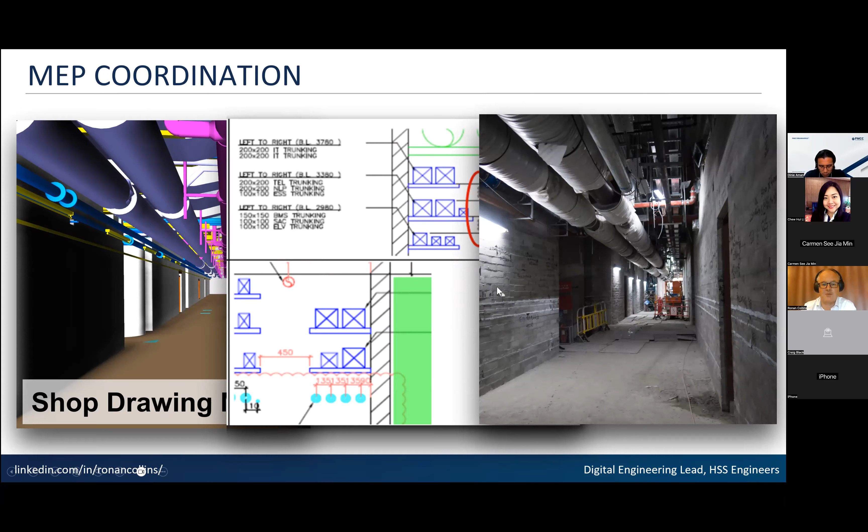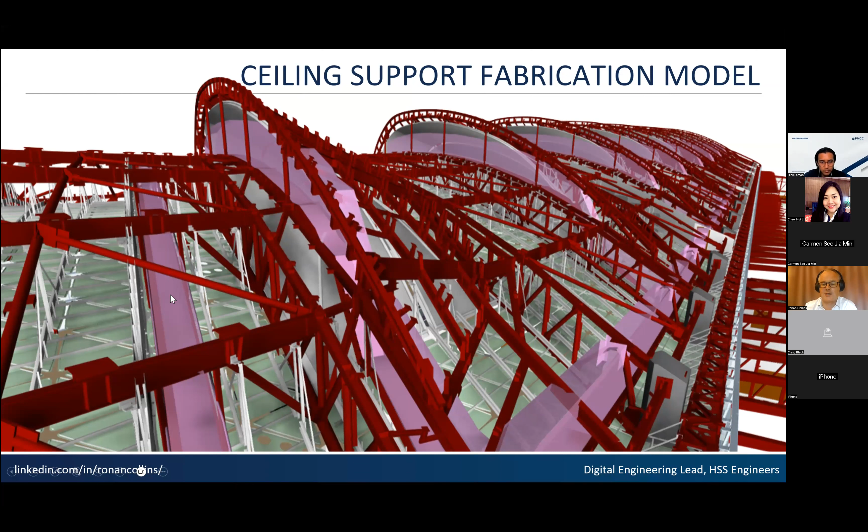So again, this is a tool that contractors get most value from. And then you've got the cladding system. So just from beneath, this is the same roof from beneath. So you can see the structure, you can see the mechanical systems, and in some areas it's quite dense. Then you can see the ceiling system, and then eventually you get to the ceilings.

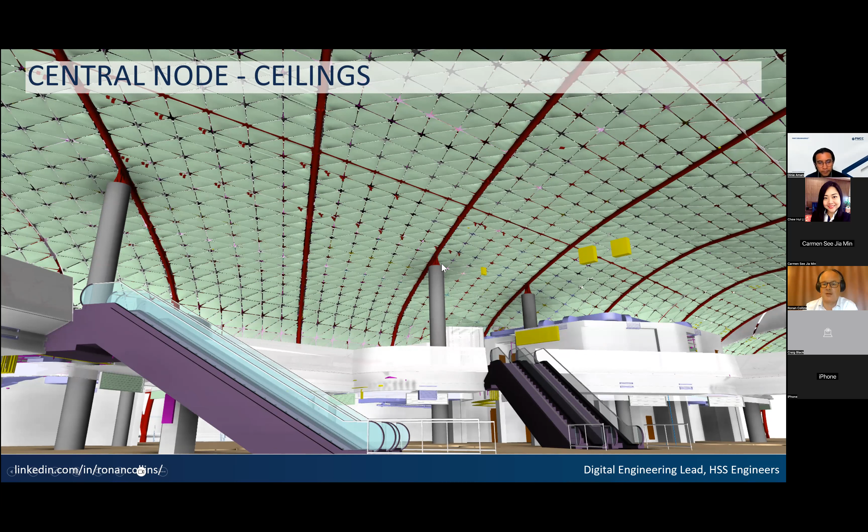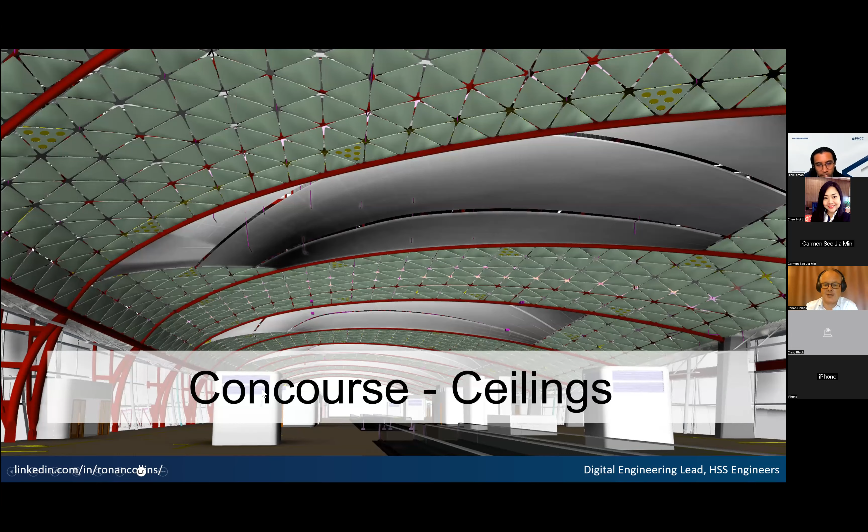We sent out the team and they did point cloud laser scanning. So they used basically a total station with a laser device on it, and they captured the steelwork position. And then we had to figure out a process to allow us to actually compare the point cloud scan from the job site to the actual models that were used from the fabricators. These are the actual fabrication models.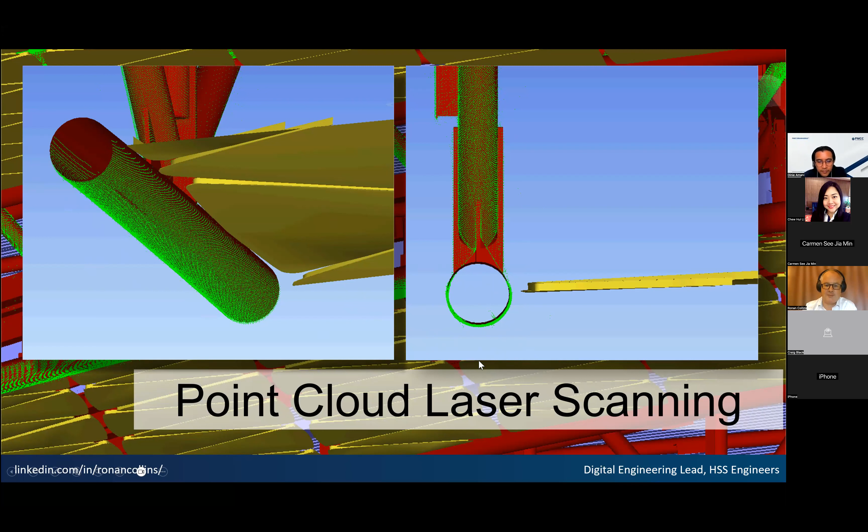And before I finish today's presentation, I'm going to show you a technology that does this instantaneously, and it's going to hopefully blow your mind. So we did it for the roof, then we started doing it for the air bridges. So we had all this point cloud scanning for all the steelwork. So again, we scanned all the structural steelwork, and we were able to tell if certain structural elements were out of tolerance. So here you can see connection plates that are too high, too low, twisted, etc.

So the green point cloud is the real steelwork on the job site, and the red is the actual detailed or shop drawing models. So here you can see a comparison between the reality capture and the actual models. Now what I want to do is show you what's happened. Okay, sorry, just going back to my family timetable. My son was born in 2014, and we moved to Malaysia in 2016, and I was, as you've already seen, working for MRT Line 2 in 2019.

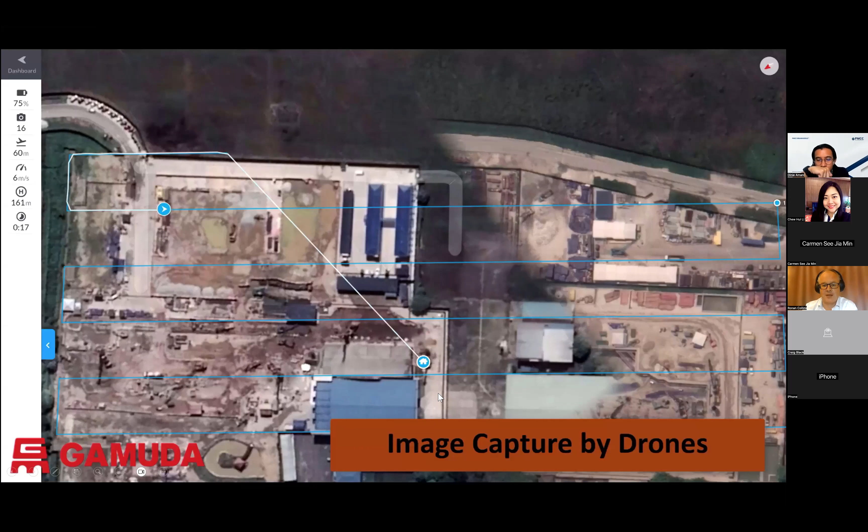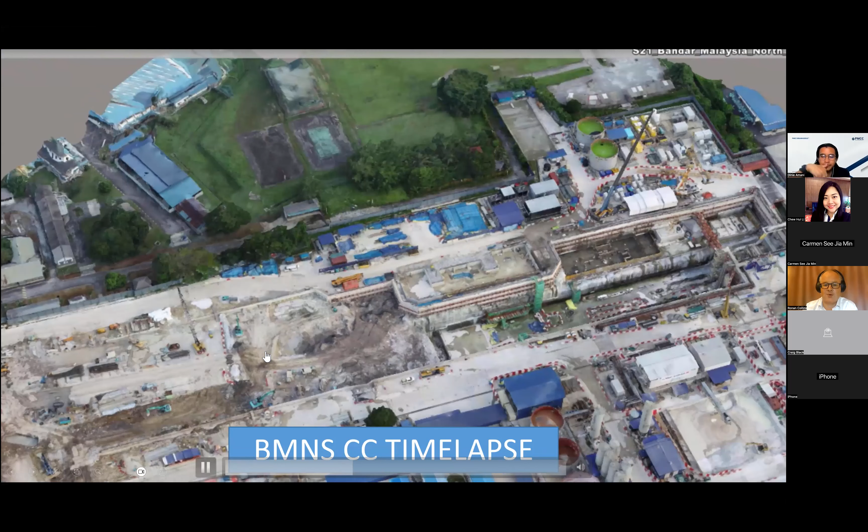One of the other things we did at the MRT was actually using drones to capture information. So here you can see basically, let's see if it's going to work. This is a 3D model captured by drones. This is the Bandar Malaysia North Station. So this is actually a model. It's compiled from photographs captured by drones, and it's every month of the construction process. So you can see from this imagery the progression of the works. You can see the tunnel machines being launched. You can see the excavation progressing.

And this is a very powerful way of recording what's happening in a project. And because this is a very accurate model, we can actually use it to measure quantities. We can measure depths. We can quantify things. So we can identify numbers of equipment. We can identify material delivered on site, et cetera. Here you can see the TBMs being launched. So this is a game changer when it comes to actual site surveying. By flying a drone every week, you can actually capture what's happening on the job site.

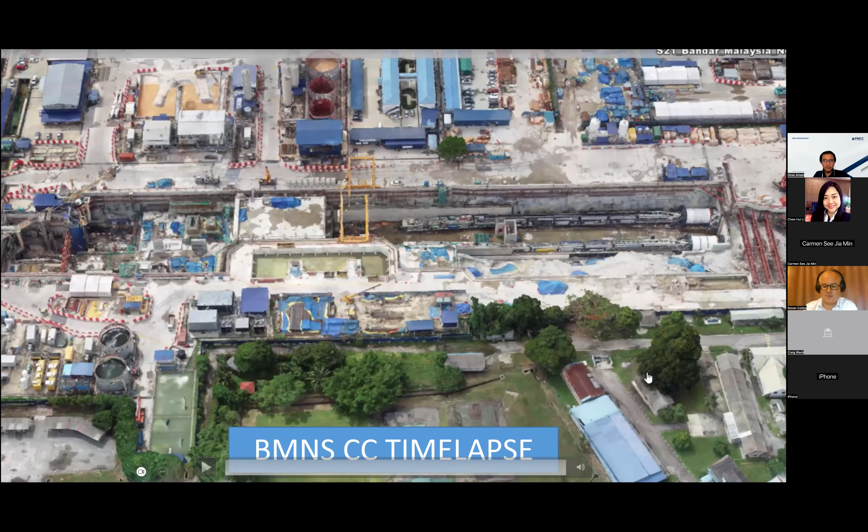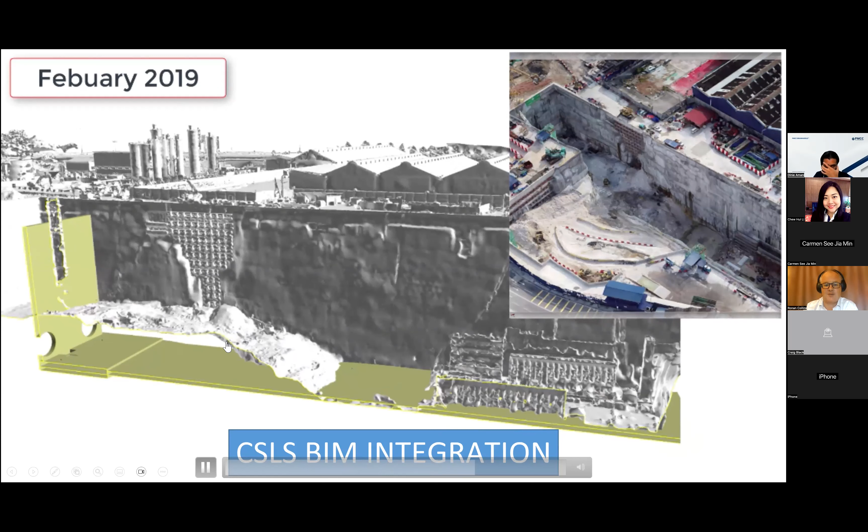And some of the use cases when it comes to BIM is, if I get this to come down, no. So you can then use this model. So this gray model is actually generated from images that were captured by a drone flying about 20 meters above the job site. So you can see the actual drone images in the top right corner. But what you can see is a comparison between the actual base level of the structure for the station against the excavation quantities. And you can see there's a bit of a TBM popping out here.

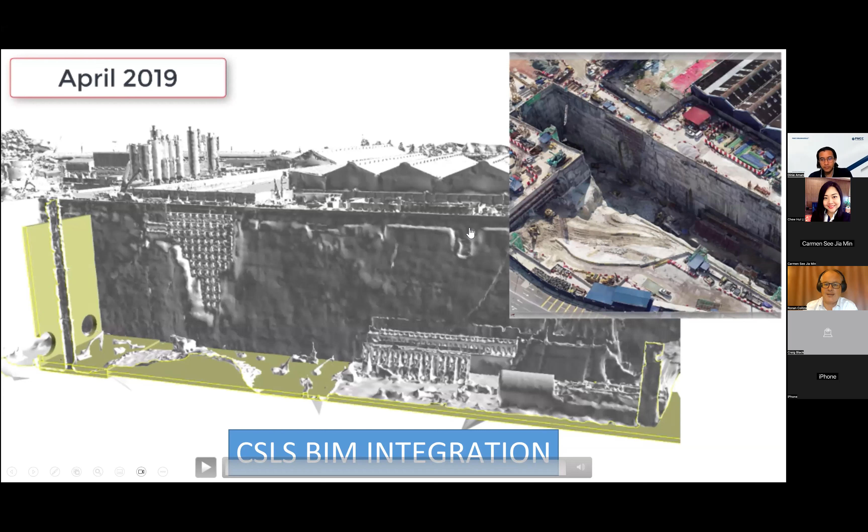You can see the actual slab being cast in the base of the excavation. So being able to compare what's happening on site to what's going on in the models. If you think about it, this was 2019, 2020. 10 years earlier, we were taking an image and trying to do a desktop study. And in 2019, we could actually compare models to models, real models from the job site against models from the actual BIM. And this is where AI is going to step in, and it's already doing it.

So what I'm going to show you is where AI fits into this. So now we're up to 2023. My son is now 9. I'm getting old. And in his lifetime, we've gone from using models and photographs from a camera to using AI to do comparisons between design and construction.

And there's a number of tools out there. So Cupix is a solution that's coming out of Korea. It's a very, very powerful reality capture tool. There's another one called Reconstruct out of the US. OpenSpace is a tool from the US that's quite common. Naska is the one I'm going to show you in a second, and Alice I've already mentioned. This is just a handful of AI tools, and these are the ones that are going to change our industry in the quickest timetable. So these tools are going to be the ones that you're going to see the most of in the near term.

And so this is Naska. I'm going to let these guys explain what it is, and then I'm going to come back in a second.

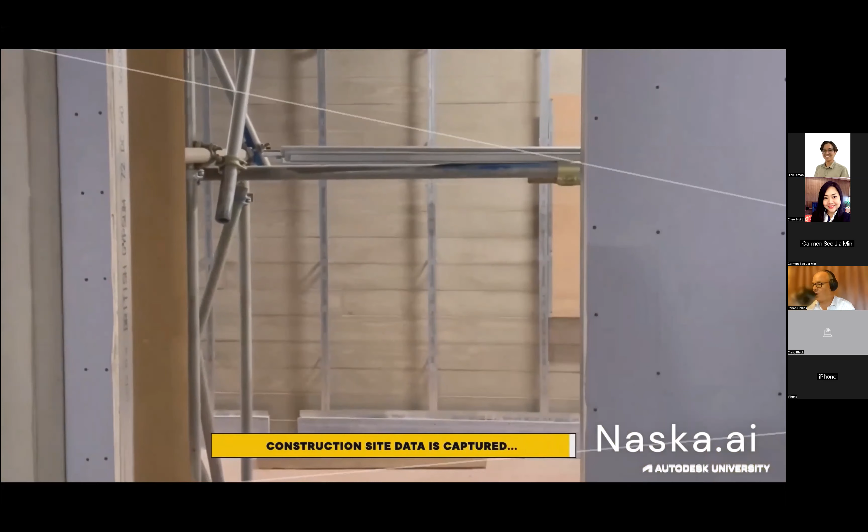We are capturing data on construction sites using devices like the BLK, which is really as easy as just walking around with this device in your hand. You don't need costly surveyors to be able to capture all that information. Walk around, capture that high quality data, upload all of that to the cloud, and then what you have is raw data that our computer vision and machine learning algorithms then go to work on.

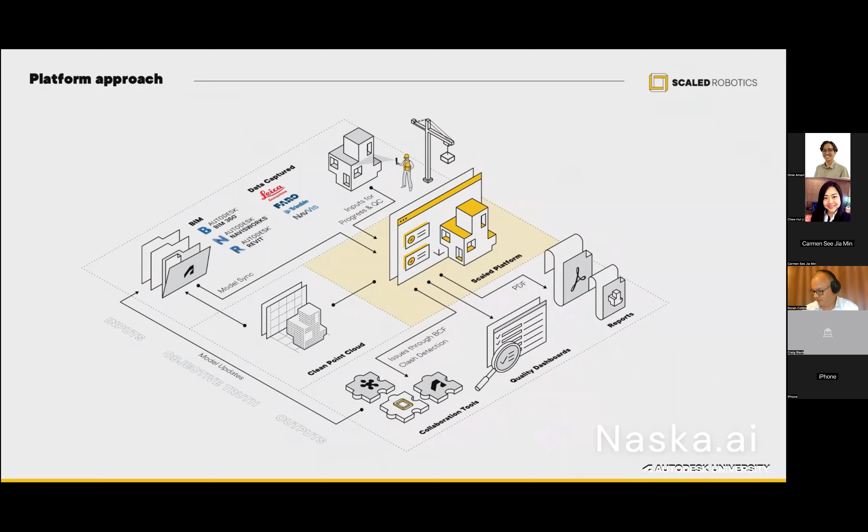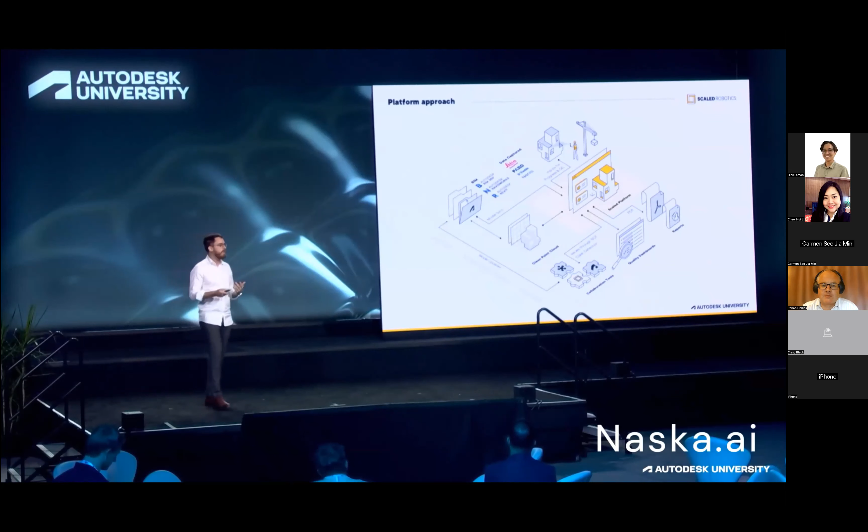We do recognize that we do not operate in a vacuum. We're not solving all your problems. We are just one portion of this ecosystem, and we're a platform that opens itself up to all of those inputs. So model data should live in ACC. Laser scan data, hey, that should come from Leica, that should come from Cyclone. We just take all the information that is already available, we process it, and then we deliver it back to you as an additional level of information. We're leveraging the investment that you have already made in these platforms to gather all this information. So we take that and we turn it into actionable information that you can then use to make better decisions on.

So we take every element in the BIM and we automatically classify it. So gray means no data, not enough information to make an assessment. Green is verified. That means it's within tolerance. That's obviously good. Red is missing, so that means that it hasn't been installed. That's not necessarily a problem. That really depends on context. And then orange is out of tolerance and has not been built correctly. And then that lighter yellow color is under construction, which means that it's halfway between being built and not being built. This means that we can immediately flag up risks on your project.

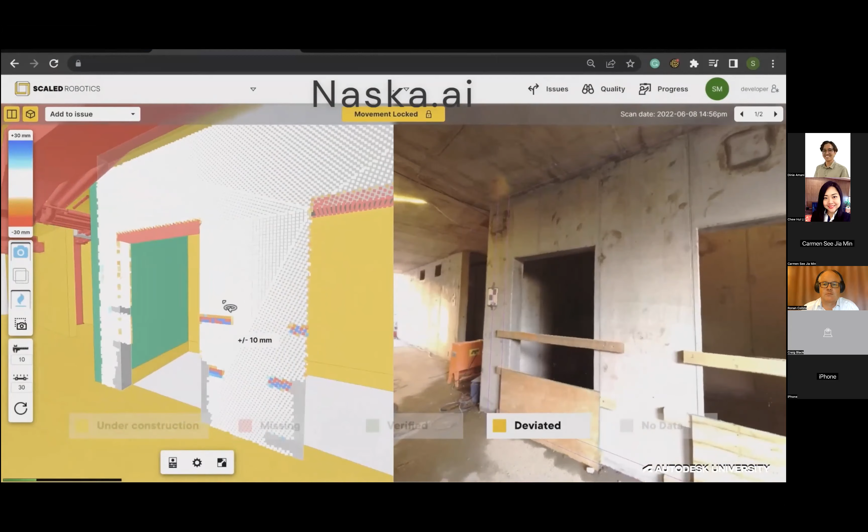Here, there's a penetration, there's a block out, it's missing. I can immediately see that it is in fact actually missing. Here, lift shaft, it's telling me it's deviated, it's been flagged up. I can visualize that deviation in 2 seconds, and I can see that the lift shaft doors are the wrong size, they're missing material on the top. That's obviously a problem. Get out ahead of that. Here, this steel column, it's missing. That's obviously not great as we're moving the project forward. And in literally seconds, I can flag all those risks up to the guys on site who are then able to make better decisions with that information. All hosted in a web viewer.

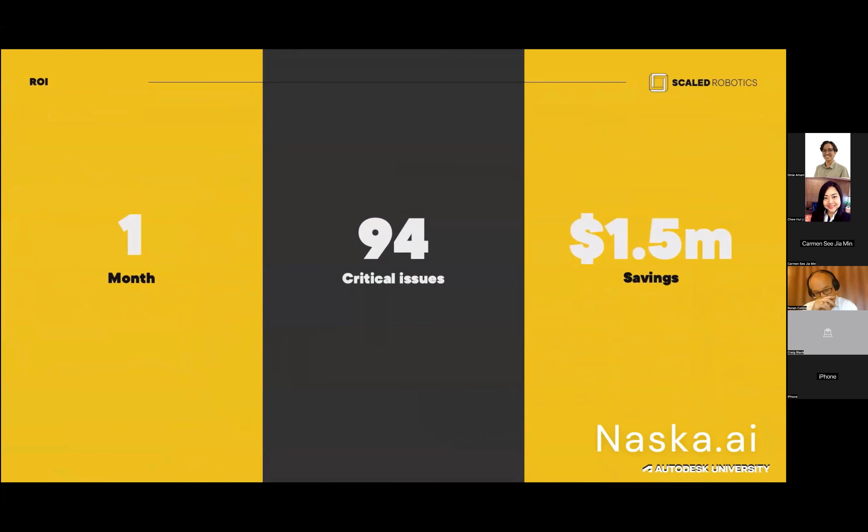Just in terms of concrete ROI, this is from a different but similar size project. Within 1 month, we quantified that we caught 94 critical deviations on that project and saved them approximately $1.5 million within 1 month, just by providing better information to make better decisions.

So that's the business case for AI right there. So basically, before we get to Q&A, I'm just going to summarize some of the stuff we've touched on today. I think you'll agree that from the kind of stuff I've shown you between where I started my career and where we are now, it's not for everybody. And that's why you see a disparity across the industry. You're going to find some companies like the Gamudas of this world, like the Arups of this world, who are invested in these technologies and will get value from them. Everybody else is going to struggle.

So in order for you to get to the point where you can compete and actually win some work, I've got a 3-dimensional solution for you, 3 Ds. The first thing you need to do is define the problem or issue you're trying to fix. Do not go out and buy technology because you think it's cool or because you saw it on my presentation today. You first of all need to define the problem that you've got. Then you need to develop a plan of attack, identify the KPIs that you're going to measure, and work out what potential solutions are in the marketplace.

So if you want to do reality capture, do you use Cupix or do you use something else? If you want to do coordination and clash detection, do you use Revizto or something else? And if you're going to pick those platforms, how are you going to do it? How are you going to set it up? Who's going to manage it, et cetera. And then once you've done your development plan and come up with your plan of attack, then you come up with your deployment plan. So you deploy it on a project, you have to train the staff, you've got to provide support to those people, and you've got to evaluate their process.